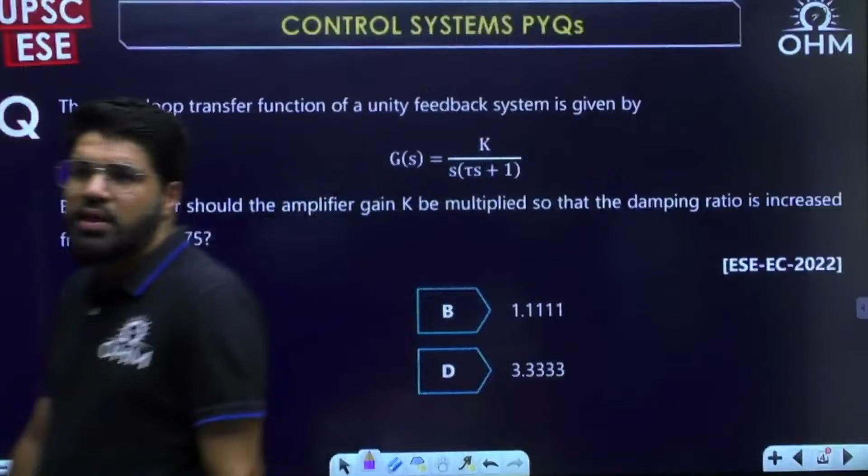So let's get moving ahead, guys, and start with the first question. The open loop transfer function of a unity feedback system is given as k upon s into tau s plus 1. By what factor should the amplifier gain k be multiplied so that the damping ratio is increased from 0.25 to 0.75? This is a fundamental question on damping ratio, and definitely from fundamental time response analysis as well as steady state errors, there are questions that come up in the examination. That is what is the first category of questions I have picked up.

If I start with the characteristic equation, it would be 1 plus k upon s into tau s plus 1 equal to 0. Simplifying this, I get s square tau plus s plus k equal to 0. Writing in the standard form, divide by tau: s square plus 1 by tau into s plus k by tau equal to 0. Now, by what factor should the gain k be multiplied so that damping ratio changes? For damping ratio, let me figure out first this term, which is omega n square. So omega n is root over k by tau. And then this central term, the coefficient of s, we all know is 2 zeta omega n.

Okay, if I place the value of omega n, which we just decided as root of k by tau, this is equivalent to 1 by tau. So what is the value of zeta? Root tau and tau get cancelled. Zeta can be written as 1 by 2 root k, and here also root tau, so 1 upon root k tau.

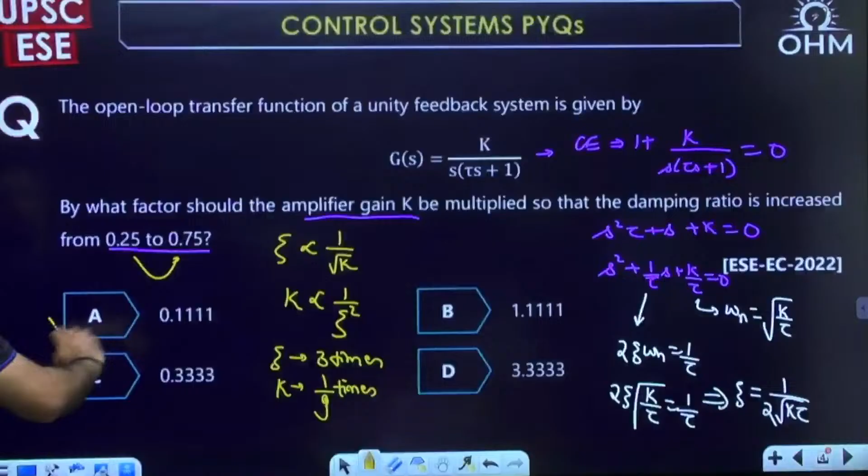Okay, answer has to be option number A. Yes, correct answer, Sai Vikas. So option number A is the correct answer. Okay, then moving ahead to the next question.

Here it is, a second order system with a zero at -2 and two poles at -3 plus j4 and -3 minus j4. This is a 2018 question, the previous one was 2022. These are the poles and zeros in the S plane. We need the undamped natural frequency and the damping factor.

This is a simple question because the zero would not be required here, if you only target the poles, which are given as -3 plus minus j4, complex conjugate poles. The complex conjugate poles for the second order control system are simply given by the formula minus alpha plus minus j omega d, equivalent to minus zeta omega n plus minus j omega d, where omega d is omega n root over 1 minus zeta square.

Now let me tell you there is a correction. They have written damping factor, but they have actually intended to ask damping ratio. Undamped natural frequency, yeah correct, they have intended to ask the damping ratio actually for the system, correct?

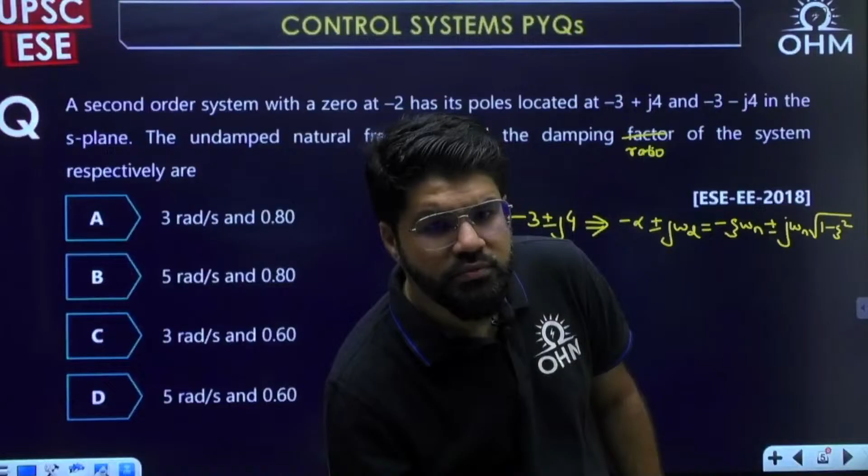Just a second. Okay, now, okay, just a second. Yeah.

Yes, good evening Nathan. Okay, so we have some answers. Sai Vikas and Rohan saying answer D. Okay, so see dear, very simple now.

If you want to calculate alpha, if you just correlate alpha, which is zeta into omega n, it is 3. The question is asking about the undamped natural frequency, which is omega n, and the damping ratio, which is zeta. What I know is the product of them has to be 3. Is there any option which satisfies the product of them equal to 3? Only option number D.

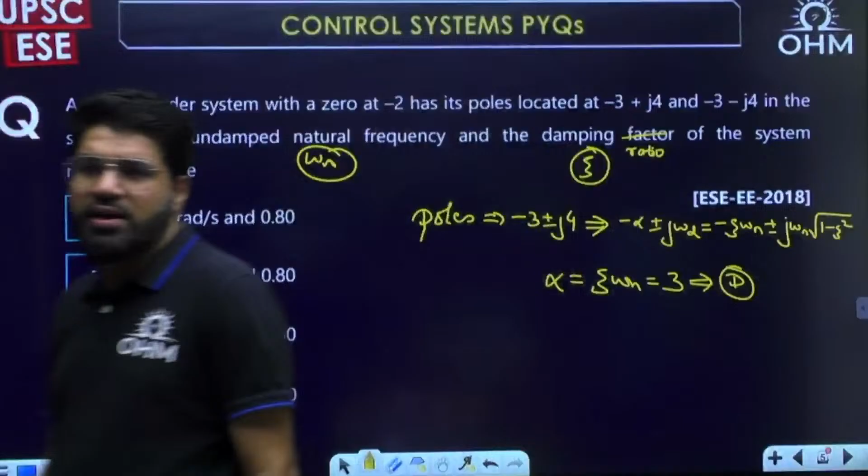You can stop here, although you have two relations, so from two relations you can find both. But zeta into omega n equal to 3 is only satisfied with option number D, 5 into 0.6. Only option number D satisfies, so you can definitely take that as the answer. Correct, okay, so yes, correct answer is option number D.

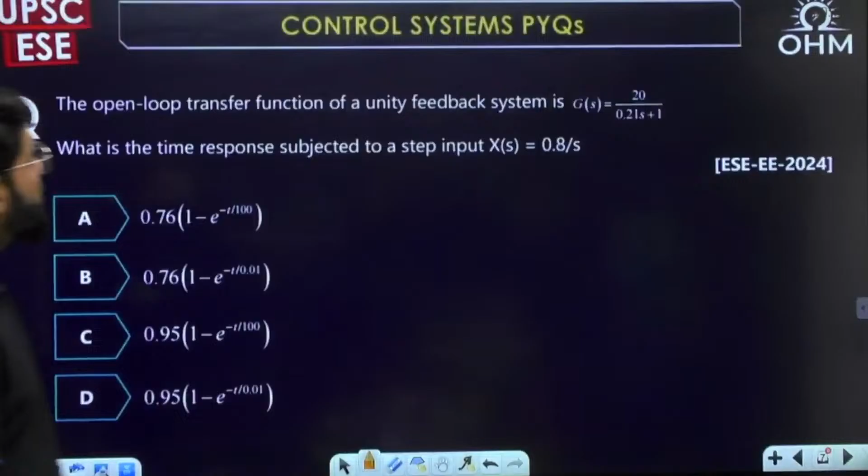Moving ahead to the next question then. Have a look into this next one. The open loop transfer function of a unity feedback system is given to you: 20 upon 0.21s plus 1. What is the time response subjected to the step input of 0.8 amplitude?

The step input of 0.8 by s is given, and the loop transfer function is given, of a unity feedback system. Now you see here, what is only given is GS, and if I talk about the closed loop transfer function, this is only the open loop transfer function given.

Unity feedback is there. The closed loop transfer function would be written as, the complete transfer function, I can write it this way: CS upon RS, which is equal to GS upon 1 plus GS, since unity feedback is there. That is what we need to simplify. So what is my final closed loop transfer function? It should be equal to, substituting GS, 20 by 0.21s plus 1, whole divided by 1 plus 20 upon 0.21s plus 1.

Correct it is. So now if I simplify, so what do I get is, it's going to be 20 multiplying by 0.21s plus 1, so 0.21s plus 1 plus 20, so plus 21. So it's basically a first order system only.

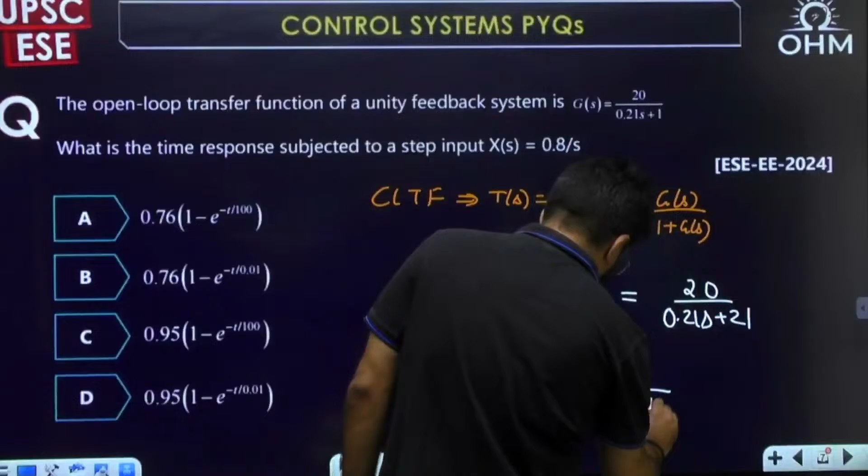So this looks like, 20 into 0.8 should be equal to how much? That is 16 divided by s into 0.21s plus 21, which we should break into partial fraction then immediately. Correct? Which we should break into the partial fraction.

So what is the output now? Converting to time domain, let me write down this expression again. 16 by s, 0.21s plus 21. That was 21 only, na? Correct, plus 21. In fact, to make it simple, you can write this way.

First of all, before taking the partial fraction, better to take 0.21 outside. So then it becomes s, and this will become 100. 0.21 into 100 will become 21. Now that becomes easy for you. This constant we can divide and simplify later. 16 upon 0.21. What is now there is some a by s plus b by s plus 100. That is what you have to simplify. Let me write down the result of partial fraction directly only then.

Okay, if I take result of partial fraction, 1 by s and the other term is 1 by s plus 100, you subtract both of them, you will get 100, so divide by 100. The 16 by 0.21 is outside. Now 0.21 into 100 again multiply, so answer is 16 by 21, then 1 by s minus 1 by s plus 100.

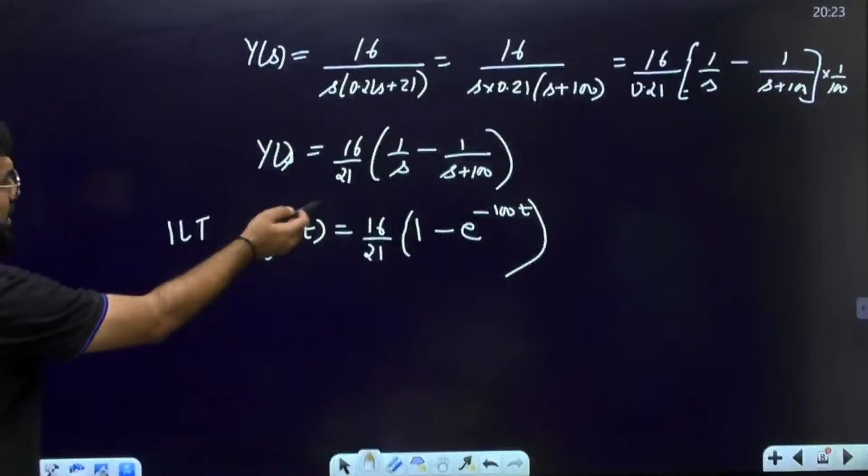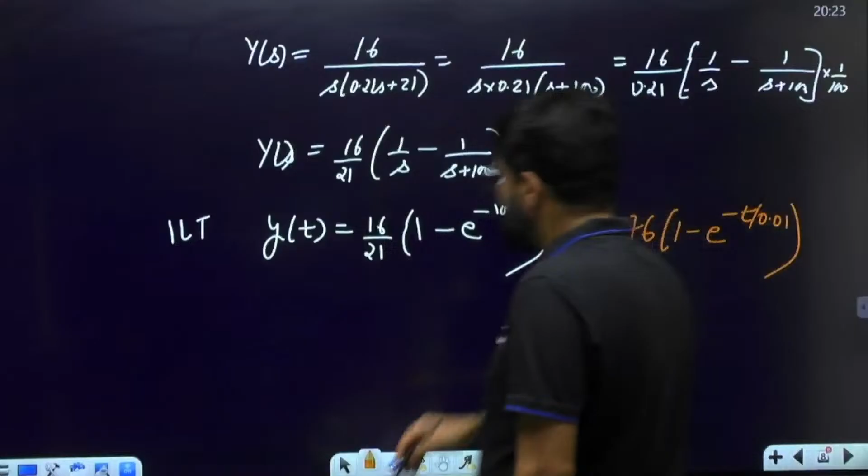16 by 21 approximately should be like 80%, 0.76, so then I will match it with option number B. That calculation part also not required, because anyways in ESE prelims you will not have the calculator, but it's not required. This can be approximated as 0.76, 1 minus e power minus t upon 0.01, e power minus 100t, correct.

So correct answer is option number B. Basic question which you can handle by the Laplace transform, nothing great there. Yes Rohan, correct answer B. Hope you have got it, any doubts you can let me know.

Correct, let's move ahead to the next question then. A basic question, a fundamental conceptual question only, 2023 engineering services.

Consider the following conditions for second order system when subject to unit step input. With critical damping, there are no oscillations. With no damping, the system output oscillates with constant frequency. Now let's see one by one. With critical damping, there are no oscillations - correct. For critically damped and over damped system, there are no oscillations, the system is non-oscillatory, so this is correct only.

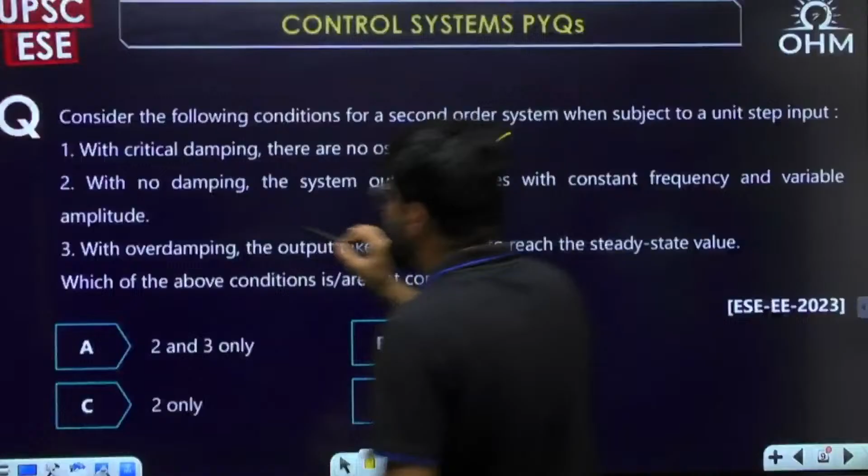With no damping, system output oscillates with constant frequency and variable amplitude. No - if there is no damping, if I take the standard response of second order system as an example, under no damping it oscillates definitely with a particular constant natural frequency, having maximum amplitude from 0 to 2, constant frequency, and the amplitude is also fixed. We cannot say variable amplitude, so the second statement is not entirely correct.

With over damping, the output takes longer time to reach the steady state value as compared to critically damped, so the third is also a correct statement. So 1 and 3 are correct statements, so option number D has to be marked.

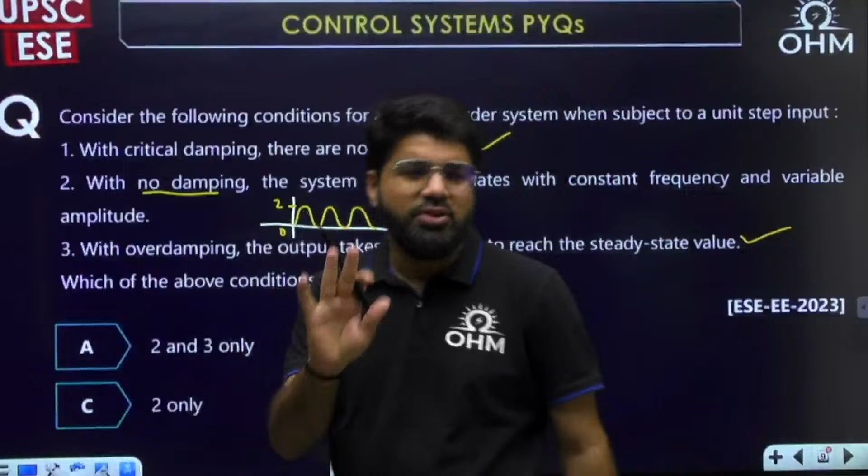So in engineering services, you be prepared for these definitions or theoretical questions. Everything should be there as a part of your notes. Nothing extraordinary to think, only basic fundamentals and facts. If you have revised your notes, it should be able to work out.

Right, sorry, it has to be option number C - the conditions which are not correct. The condition which is or are not correct, then it is C. But 2 is the only not correct one; 1 and 3 are the correct ones. Yes Rohan, 1 and 3 correct.

Yes PRV, correct answer. Option will be C because the question is finally asking which of the above conditions is or are not correct. So not correct means 2, that is option number C.

Right, so moving ahead to the next one. Moving ahead to the next question.

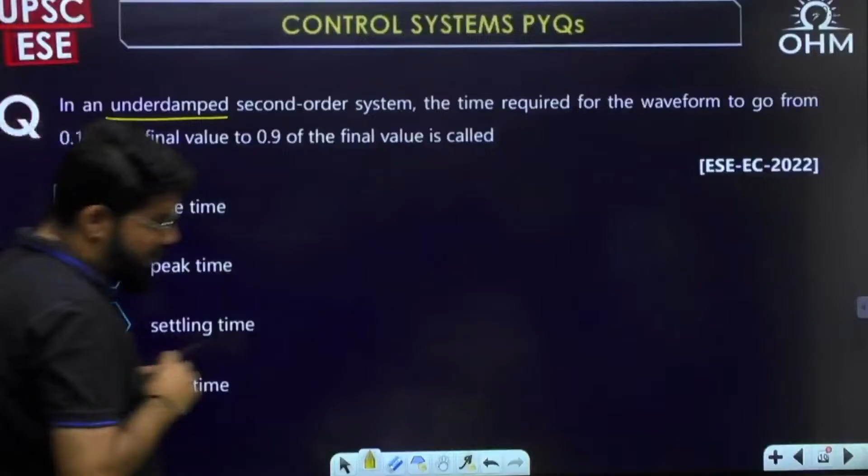In an underdamped second order system, the time required for the waveform to go from 0.1 of the final value to 0.9 of the final value. Now see, this is not 100% a correct question, because for underdamped systems, in different textbooks some different definitions are specified, but normally for an underdamped system, the rise time is defined as the time taken to reach from 0 to 100.

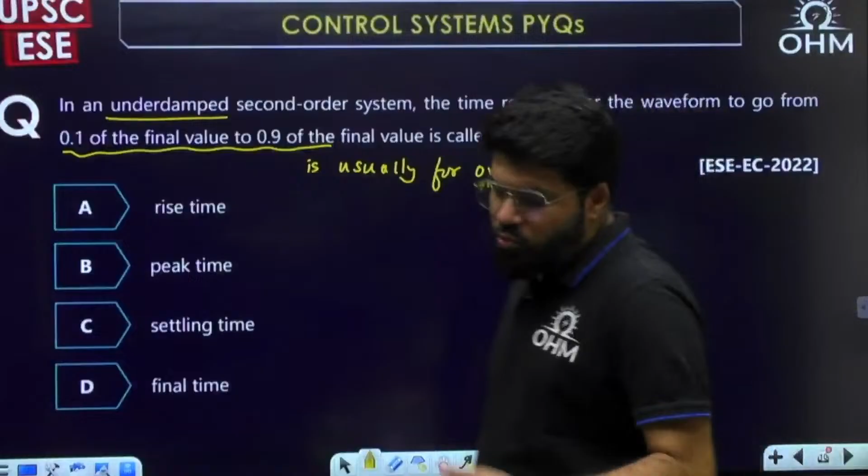This 10% to 90% definition is usually used for overdamped systems. But for underdamped systems, we mostly take it as 0 to 100%, that is the time taken to reach the final value for the first time.

But if some question is there, why have I still taken this? See, if there's an official 2022 question, we all know this is not peak time, settling time, and final time. Peak time is when the output reaches its maximum value, where the first overshoot occurs, where the peak overshoot occurs.

Settling time is the time where the output settles to a specific percentage of the final value, like when it reaches more than 95% or more than 98%, you can decide that percentage. So definitely it is not that - it is definitely rise time, but not 100% correct definition. But if an exam question is asking about rise time, that intent is clear, you should not overthink and directly mark the option.

One or two more questions around these definitions I want to show you. Have a look at this question, from 2022 only. Following statements regarding time response specifications: delay time is the time required for the step response to reach 10 to 90%, or 5 to 95%, or 0 to 100%. Now delay time is usually the time required to reach 0 to 50%.

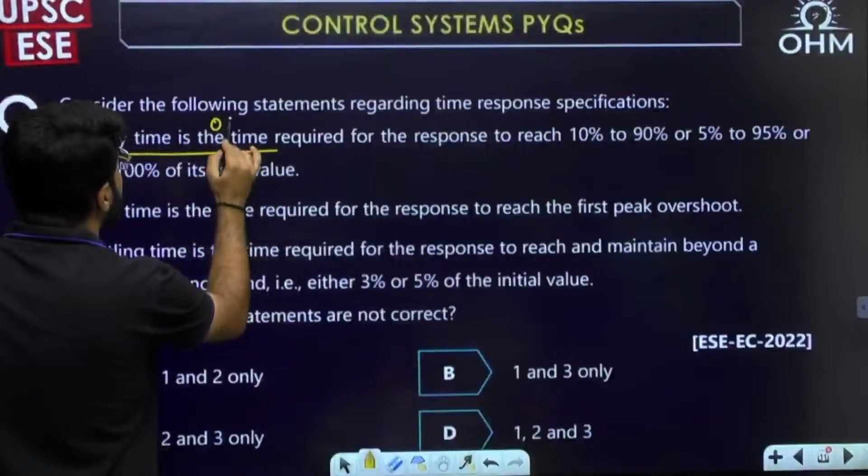These are the definitions for rise time. As I told you, this is the rise time definition for underdamped system. And 10 to 90% or 5 to 95% is usually the rise time definition for overdamped system. Now let us see what the second statement is telling.

Peak time is the time required for the response to reach the first peak overshoot. Correct? First peak overshoot, right? So this is true - time required to reach the first peak overshoot is the peak time.

Settling time is the time required for the response to reach and maintain beyond a specified tolerance band, that is either 3% or 5% or maybe 2% - they just gave an example. So this is also correct.

So which of the statements are not correct? I don't think this question is correct because second and third - again they are asking which of the statements are not correct. First is not correct.

With first and second - peak time is the time required for the response to reach the first peak overshoot, correct, first peak overshoot. Settling time is the time required... oh sorry, yeah, I read it wrong.

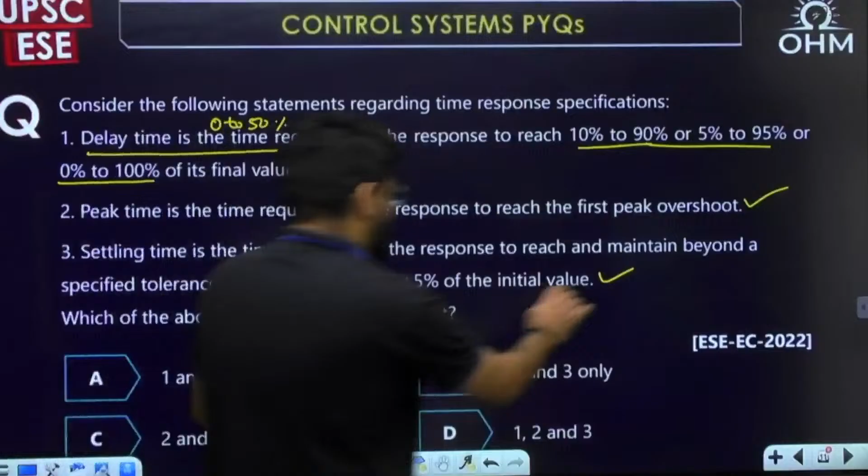This is false only because it says 3 to 5% of the initial value - the correct statement is final value. So rereading the definition, peak time is the time required to reach the first peak overshoot is the correct definition.

The first one was also wrong. Settling time is the time required for the response to reach and maintain above a specified tolerance band, that is 3 or 5%, or sometimes 2% also, of the final value, not of the initial value. So this is wrong - it should be final value, then it is the correct statement.

So 1 and 3 are wrong, and then option number B. Let me check it. Yes, correct answer - option number B it is. Let's move ahead.

Okay, Rakesh, yes. Okay, moving ahead to the next question.

Rise time again, see, 2024, last year question only. Rise time for the underdamped system is the time required for the response to rise from 5 to 95%. Again, you see for underdamped system they have mentioned this definition. I told you, usually we call it for overdamped, but okay, let me read the next also.

The amount of maximum overshoot directly indicates relative stability - higher the overshoot generally indicates a less stable system. This is definitely correct, because higher system having higher and larger overshoot usually is less stable. Settling time is the time required for the response to reach and maintain within a specified tolerance band, that is either 3% or 6% of the final value - again a true statement.

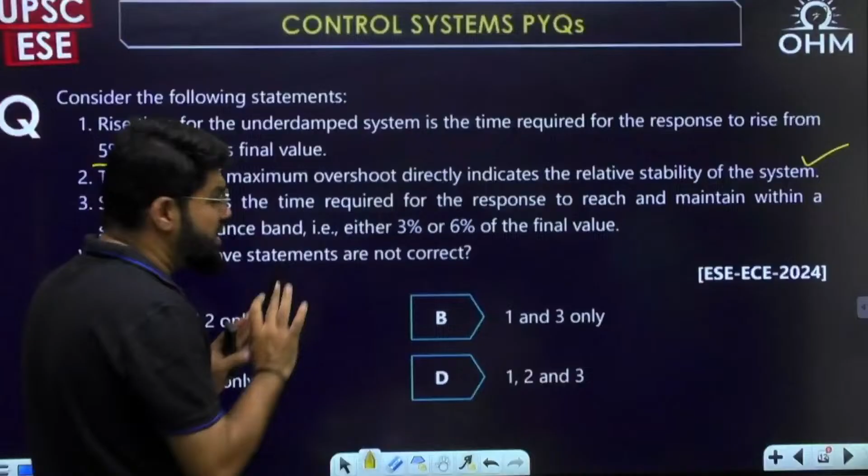Tolerance band is 3% or 6% of the final value. See, usually this is a correct statement, but again, as per standard book, normally what is settling time? Settling time is the time required by the output to reach within a specified percentage of the final value. Now that specified percentage you could specify as 98%, 97%, 95% also. But usually going beyond 95% we don't talk.

Conceptually, this is correct, but practically we don't talk about the value greater than 5%. So for that point of view, I would call it as false. So we can take this as, if it was 5%, then we can take it as okay. Again I say conceptually it is okay, but practically we don't accept that tolerance to be greater than 5%.

In fact, see why I am telling you conceptually this is correct, because in GATE examination once there was a question where they have discussed settling time with 6% of the value. In GATE exam they have actually discussed that question once. So conceptually it is okay, conceptually we can define settling time.

Let the settling time be the time required by the output to reach 94%. I am happy with 94%, even if my output reaches 94% or above, I will call that as settling, I will call that as steady state. And there is a question in GATE on the same concept, the 6% concept. So conceptually it is correct, but practically we don't consider beyond 5%. For that point of view, I will call it as a false statement.

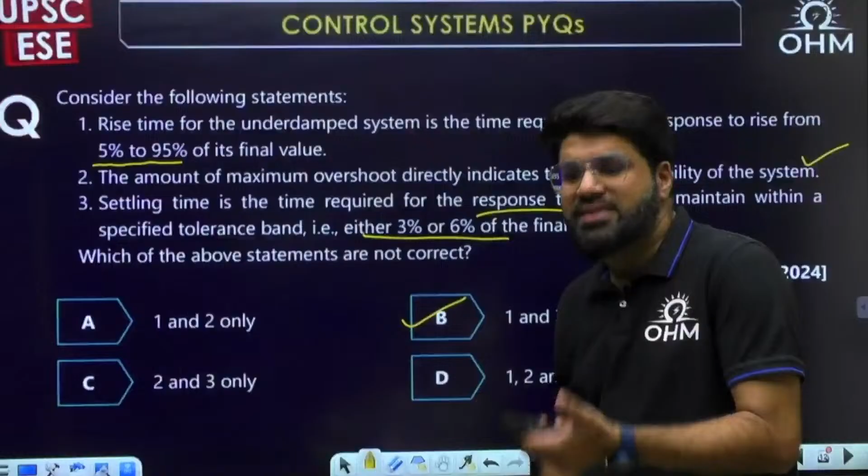No, Sai, because that is different. 6 by omega n is for critical damping. I'm not talking about the 6 by omega n formula, I'm talking about a question where 6% criteria was used. The formula you're telling me, 6 by omega n for critical damping, is the correct formula, but that is only for the 2% band, dear. That means when the output becomes 98% of the final value, that is the formula 6 by omega n.

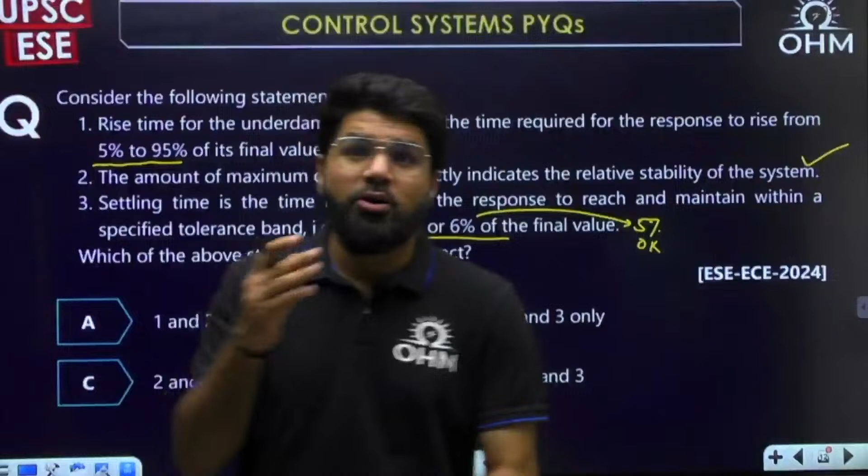I am telling you, there was a question in GATE where the output, they told, find a time, let the steady state be the time where the output reaches 94% of the final value. That percentage was specified, so tolerance becomes how much? The tolerance band becomes 6%. What you are telling is a different concept, that is correct for critical damping, but that is only 2% tolerance band. That formula, if you check correctly, is a 2% tolerance band formula. Okay, next question, dear.

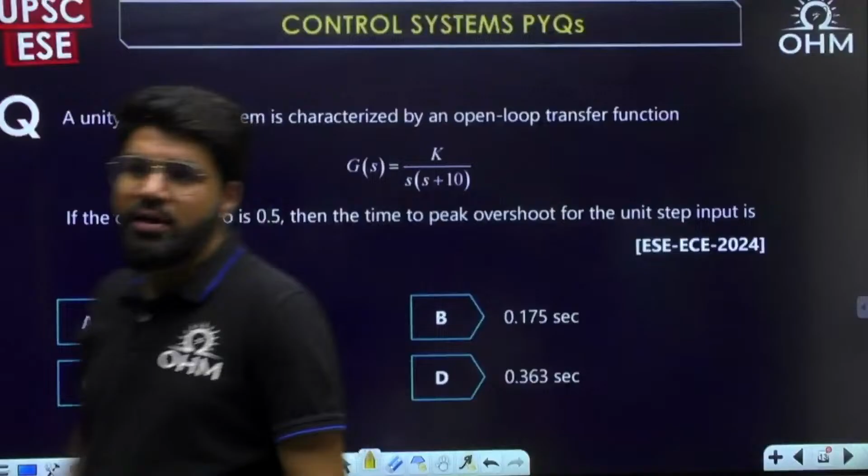A unity feedback system is characterized by open loop transfer function K upon S, S plus 10. If the damping ratio is 0.5, then we need the time to peak overshoot per unit step input. What do we need to calculate the time to peak overshoot? TP is given by pi by omega d, or pi upon omega n under root of 1 minus zeta square, where damping ratio is 0.5. The damping ratio zeta is given already, but we also need to figure out omega n from the given transfer function.

Given the open loop transfer function, I'll convert it to the characteristic equation: 1 plus GSHS equal to 0. So what do I get? S square plus 10s plus k equal to 0. Now, I'll use this term, because 2 zeta omega n is equal to how much? I need omega n, which can be obtained here directly. The k will not be required. 2 zeta omega n is 10, and zeta is given as 0.5. So 2 into 0.5 into omega n equals 10. So 0.5 into 2 equals 1 only. So omega n becomes 10.

If omega n is equal to 10, then Tp is given by pi divided by omega n under root of 1 minus zeta square. Omega n is 10, zeta is 0.5, 0.5 square is 1 by 4. So this is what we need to solve. This will finally turn out to be pi divided by, the 2 will cancel with 10, giving 5 root 3. So pi by 5 root 3. Of course you can complete the calculations on your own. Calculators are not there for ESE prelims, but right now let me just write down the answer.

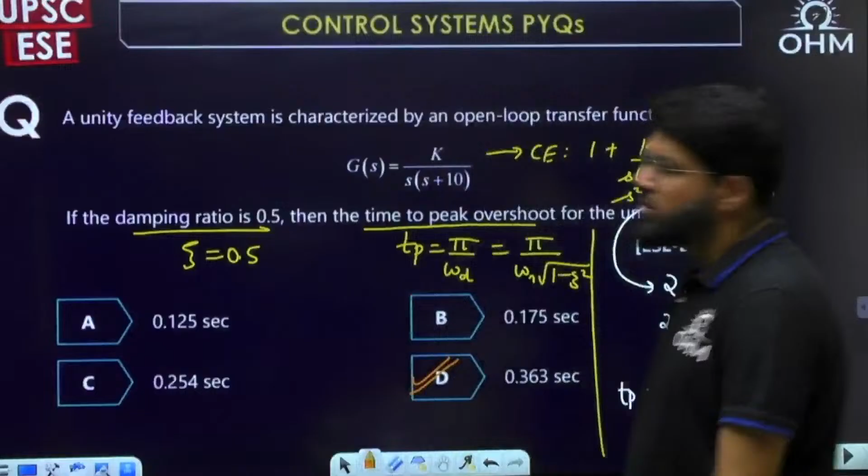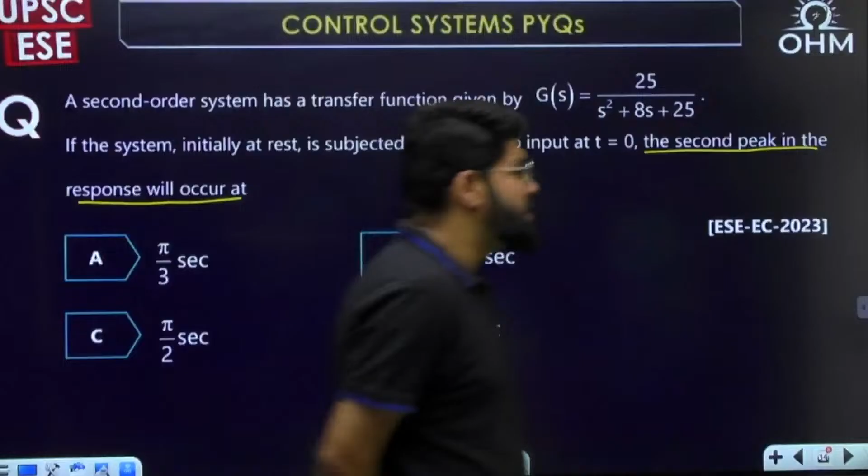A second order system has the transfer function 25 upon s square plus 8s plus 25. If the system, initially at rest, is subjected to a unit step input at t equal to 0, the second peak in the response will occur at... The first peak is the peak overshoot. The time for the second peak is given by the formula 3 pi by omega d. This is because the time for any overshoot is generally given by the formula n pi by omega d, where n equals 1, 3, 5, 7.

This is generally the time for any peak or overshoot. For any undershoot, the same formula applies, but n is even, at even multiples of n pi by omega d, meaning 2, 4, 6, etc. You get the respective undershoots. That is the formula to be used. Now, that means what I need is 3 pi by omega d.

Omega d is again required, so we can compare and find the value. Omega n square is 25, so omega n is 5. Then 2 zeta into omega n, which is 5, is equal to 8. So how much is zeta? 8 upon 10, that is 0.8. So this is 3 times pi by omega d. Omega d is omega n, that is 5 under root of 1 minus 0.8 square. Simple calculation, because 1 minus 0.8 square will be 0.6 square, and that is under root 0.6. 5 into 0.6 will be 3, and 3, 3 cancel, so the answer is only equal to pi.

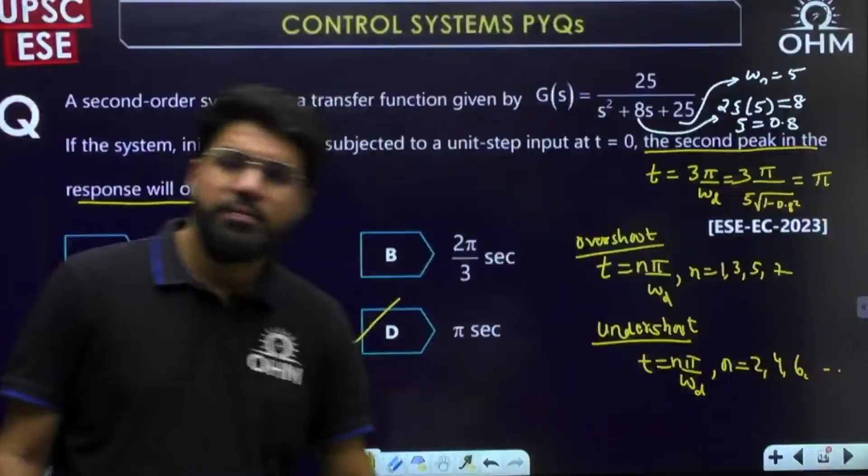Yes, Vikas, correct, answer D. Yes, that is the correct answer. Yes, Rohan said correct answer, D is the very correct answer. Moving ahead to the next one.

This is a good question, from 2022.

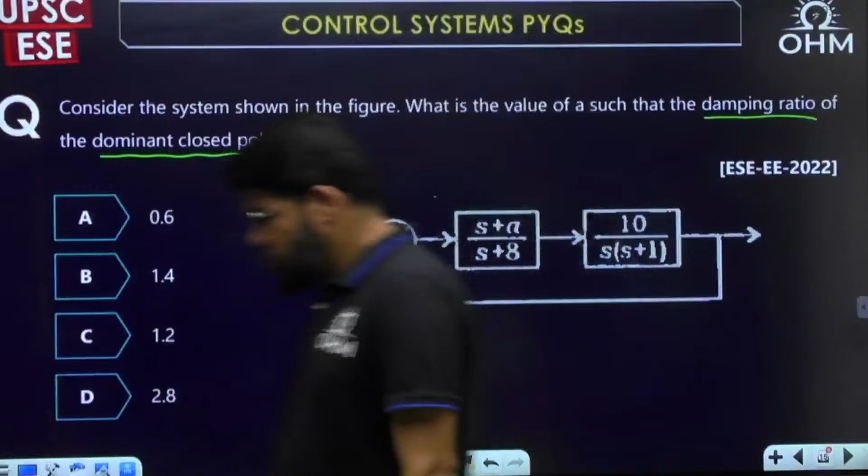Consider the system shown in the figure. What is the value of A such that the damping ratio of the dominant closed loop poles is 0.5? Let us work it out.

What is clearly the type of system going to be formed? S plus 8 into S plus 1 is definitely going to be a cubic characteristic equation. So what is the characteristic equation? If you start with 1 plus 10 into S plus A divided by S, S plus 1, S plus 8, this is going to be 0.

Now, if you multiply this out, it becomes S cube plus 1 plus 8, 9S square, plus 1 into 8, 8S, plus numerator expanded, 10S plus 10A equal to 0. So this is equivalent to S cube plus 9S square plus 18S plus 10A equal to 0.

Now, the question is, what is the value of A so that the damping ratio of the dominant closed loop poles is 0.5? The zeta should be 0.5.

If there is a characteristic equation which is of third order, it can be factorized as some S plus alpha, multiplied by S square plus 2 zeta omega n S plus omega n square equal to 0. What is the basic idea here? A cubic characteristic equation can be factorized into a first order and second order term. For the second order dominant poles, they have given the zeta. The only parameter known to you is zeta.

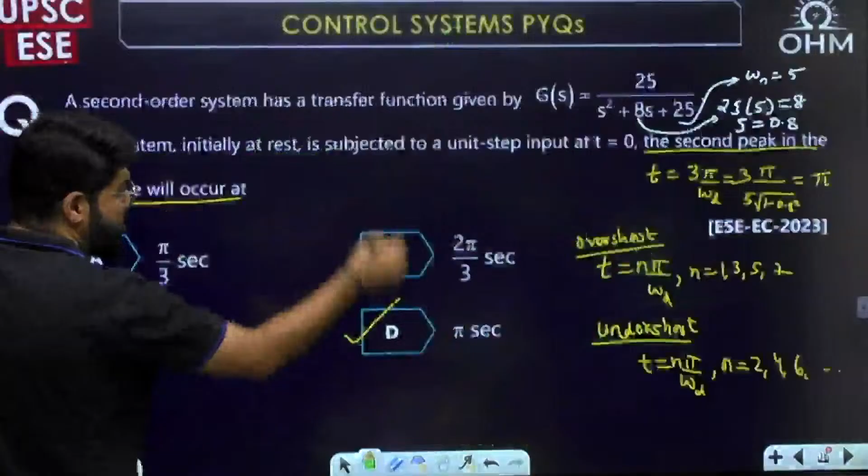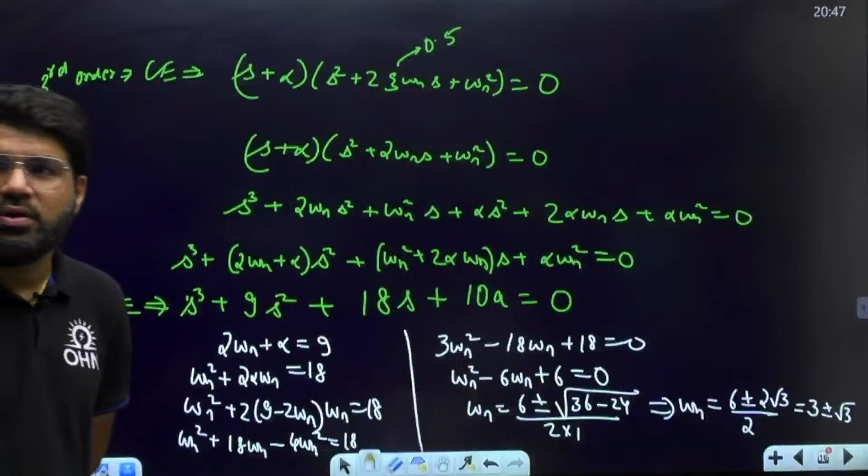3 plus minus root 3. Right, 3 plus minus... okay 3 plus minus root 3, I'm sorry. So that is 3 plus minus root 3. Omega n obtained is 3 plus or minus root 3.

Let us come to alpha now. What is alpha? Alpha is equal to 9. From here I have written alpha is equal to 9 minus 2 omega n. That is alpha. And the final value is alpha into omega n square. Let us see which of the options is actually going to match, alpha into omega n square.

So alpha can be 9 minus 2 into 3 plus minus root 3. So this becomes 9 minus 6, and then minus plus 2 root 3. So this is 3 minus plus 2 root 3. So there are two sets of values with me.

So if alpha is 3 minus 2 root 3 corresponding to the first value, then omega n I have taken as 3 plus root 3. And if omega n is taken as 3 minus root 3, then alpha will become 3 plus 2 root 3.

Question asks for the value of 10a, then we'll find a also. 10a is equal to alpha into omega n square. Right, alpha into omega n square. Correct, alpha into omega n square.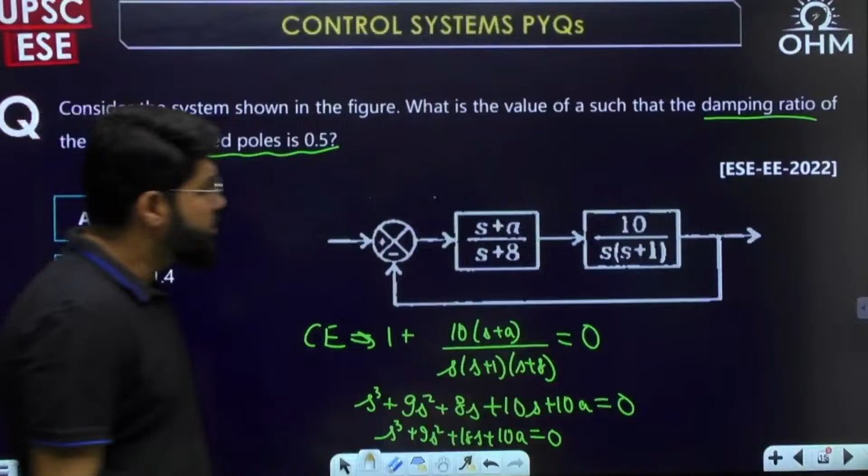Yeah, the steady state value will not be affected. That is what we have to take care of when we neglect the insignificant pole. They have told you that this has to be dominant.

But what is the characteristic equation in front of us? It is cubic. So I'm comparing this cubic equation with what can be a general cubic equation. Okay, so this is alpha into omega n square.

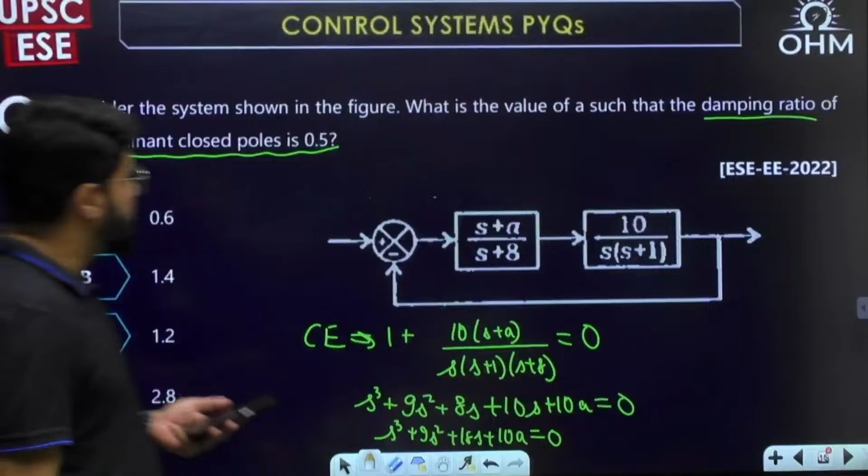So it leads us again to a detailed calculation. I think from here you can just calculate and complete it. This is definitely a time taking question.

No, see, what you are trying to neglect, Sai Vikas, you can't do directly. Why? Because you are trying to neglect the s plus 8 term from this transfer function. But the question is telling the dominant poles are the poles of what? Poles of the closed loop transfer function. You are trying to neglect s plus 8 from the open loop transfer function. So from that you will not be getting the answer.

If the closed loop transfer function was given and they mention that the second order poles will be dominant, then I can neglect, but the closed loop transfer function is not given. The open loop transfer function is given.

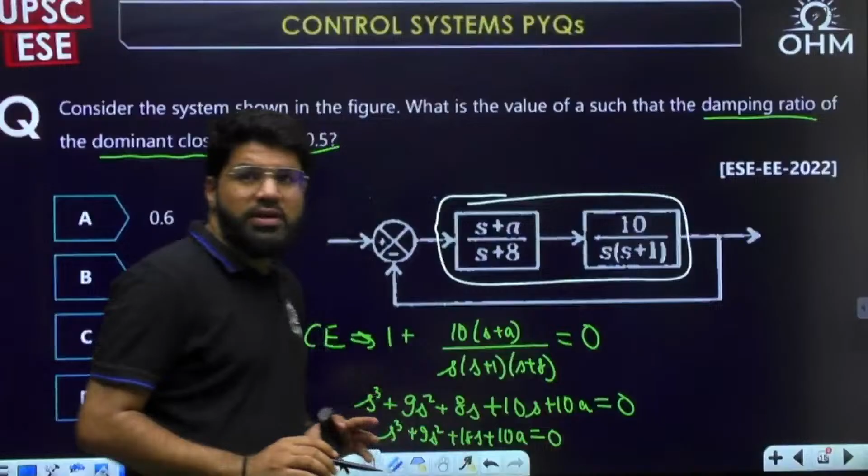And if you see in the open loop transfer function, there will not be any underdamped condition. There will not be complex conjugate poles as well. So that is not the correct logic. Your rule is correct, if you have to neglect, we'll take 8 common and all, but you are thinking only with respect to the open loop transfer function.

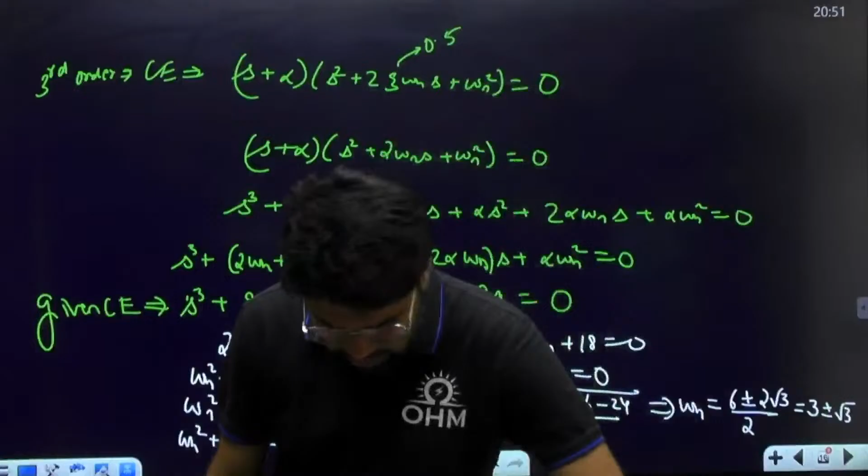Correct, Sai Vikas. Some calculative part is there that you can deal with and complete the answer, because the rest everything has been put in place. No further issue that I see—just recheck the equations I have written. I have given you how to solve this question numerically.

Going to the next question. What are the steady state errors for the inputs of 3ut, 3t ut, and 3t square ut respectively of the system shown in the figure, where ut is the unit step input. This is a 2024 previous year double question.

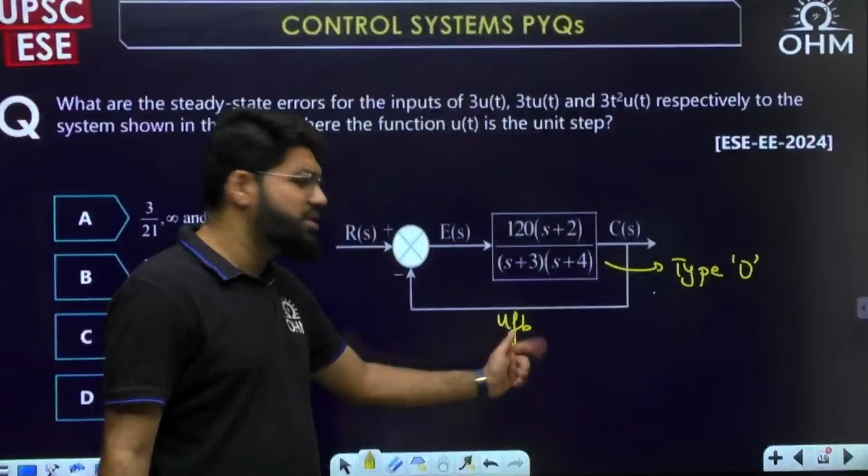Now if you see, what is the type of the system? It is clearly a unity feedback system. So I can define the type of the system. Are there any poles at origin? No. Type is the number of poles of G(s) at origin when the system is in unity feedback. So there are no poles of G(s) at origin—it is type 0.

Now, if this is type 0, what is the steady state error for unit step input? It will be finite. For unit step, but there are two answers you don't need, because it is type 0. The steady state error for unit step input is 1 upon 1 plus Kp, where Kp we will find out. But for unit ramp and for unit parabolic, any higher order input, in a type 0 system only the step input will give the finite error; any higher order input will give the infinite error.

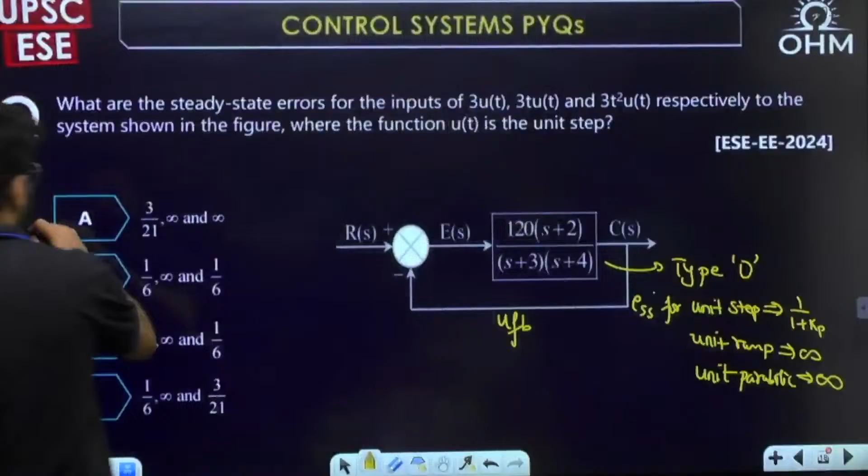And that leads to option number A. Finish—why solve further? Option number A.

Some finite answer for unit step. For 3ut, it will not be that one—for 3ut it will be 3 upon 1 plus Kp. That also you have to take care of: if the input is 3ut, the error is also amplified because of the linearity property of the system. So 3 upon 1 plus Kp. But that is also not required, because for ramp and parabolic, it has to be infinite.

This is the ramp input, and this is the parabolic input. So some constant and infinite—option number A. That constant also you can find out if you want; what is there in that, you can find out easily.

Next question. See, same year, same branch—you see the question. Doubly 2024, two questions on the same concept, on the same theme, only the data changes. Again, same unity feedback configuration given, only thing is it is a type 1 system.

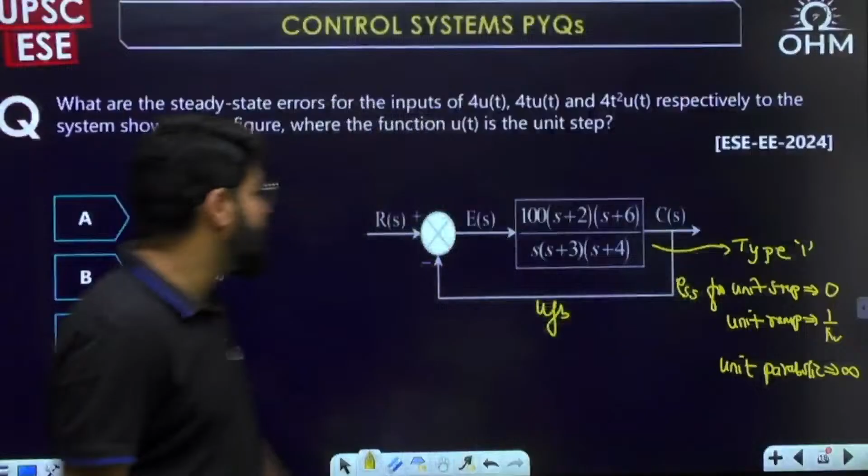So type 1 system means steady state error for unit step would be 0. It will give a finite non-zero error for ramp—for unit ramp it is 1 upon kV—and for unit parabolic it is infinity. So the answer sequence should be 0, finite, and infinity. Option number B, here it is.

Option number B, again a visual question. Only thing is here for 4ut it will be 0. For 4tut, this is what you have to think: if you are actually calculating, it should be 4 upon kV. I have written the result here for unit ramp, but for 4tut, that is 4 times ramp, the error will be 4 by kV—that you have to take care of.

That kV you can find—you know how to find kV: limit of s tending to 0, s into G(s). Not required here, so don't complete it. For the previous question, if you were to complete it, you have to find Kp, which is limit s tending to 0 of G(s).

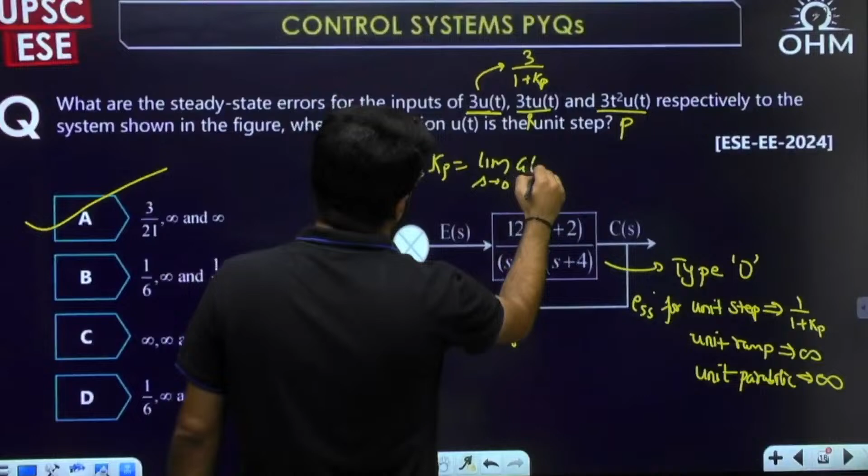Same year, two questions on the very same concept. So this is the answer B. Rohan correct, Hovant correct—option number B, it is simple.

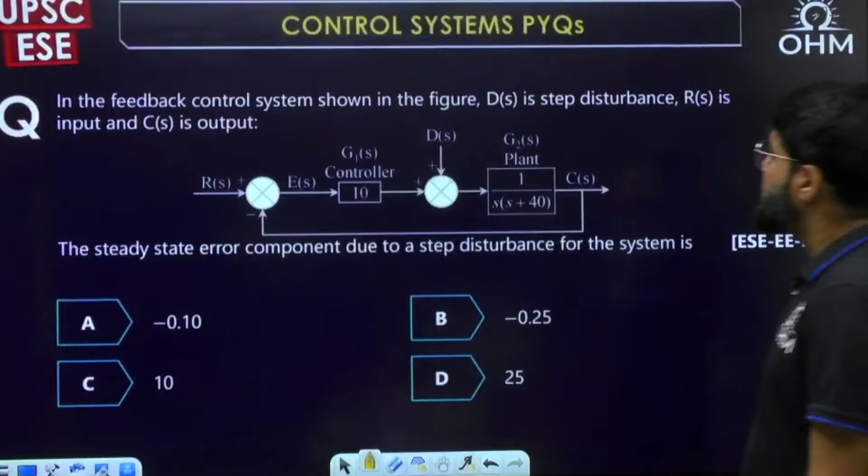Next question, 2022 double E question. In the feedback control system shown in the figure, DS is the step disturbance, RS is the input, and CS is the output. The steady state error component due to step disturbance - so now we are going to calculate steady state error due to step disturbance.

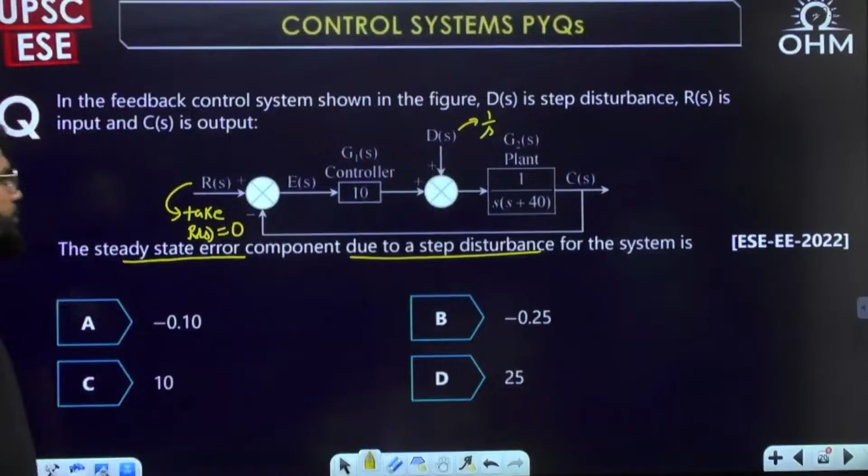When the disturbance is unit step, and unit step in Laplace transform is 1 by S, when you are calculating error due to step, automatically the input will be 0, its Laplace also will be 0, because we are calculating the error component due to disturbance input. The actual input you are going to take as 0 only.

This is due to the step disturbance. So then what is the error definition? Error is defined as the difference between the reference input and the obtained output, RT minus CT. It is RT minus CT, but since you have taken RT or RS equal to 0, error will be minus of CT.

As soon as you take RS equal to 0, what type of picture will you have in front of you? This is the plant gain, suppose G2. I'll make a simplified picture here, G2, and this is your output C.

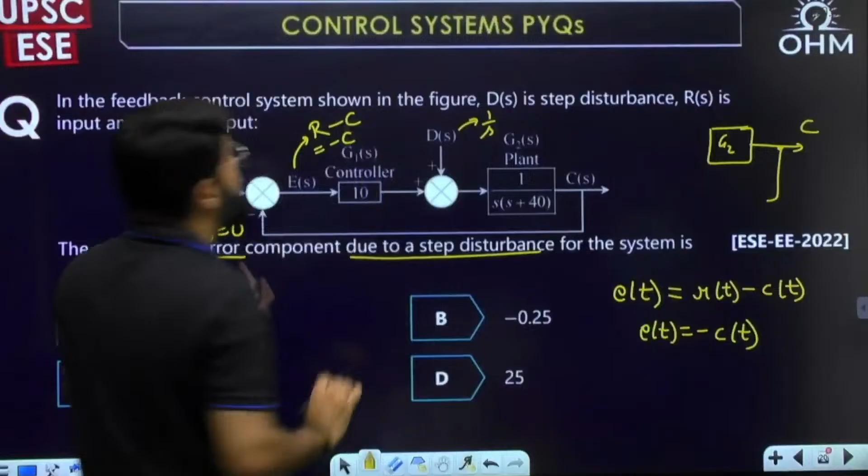Very clearly mentioned here - what is the error signal? It is the difference between RS and CS, R minus C, but R will be taken 0, so you will have to calculate minus C. That will be the error, but due to step disturbance.

So this is G2 and this is the output C, and since R is 0, you can adjust this minus gain here or to the gain of the next controller, and that is minus 10. This gain will become minus, and this minus has to be adjusted. R is 0. This is minus ES into 10.

This goes to the summing point where the disturbance signal D is applied. So what is the output C then equal to? Or we can write down C by D here. What is going to be the C by D ratio?

Considering D as the disturbance input, the forward path gain G2 divided by 1 plus - it looks like positive feedback, but the feedback gain is negative, so 1 minus of G2 into minus 10, that is 1 minus GS HS, HS is minus 10 here. Why 1 minus? Because this looks like positive feedback. So it is ultimately G2 upon 1 plus 10 G2.

G2 I can substitute, or we will do it later only. So what is the output C? It is equal to D into G2 upon 1 plus 10 G2. Now, what is the steady state error? Steady state error is limit T tending to infinity ET, or by the final value theorem, it is limit S tending to 0, S into ES.

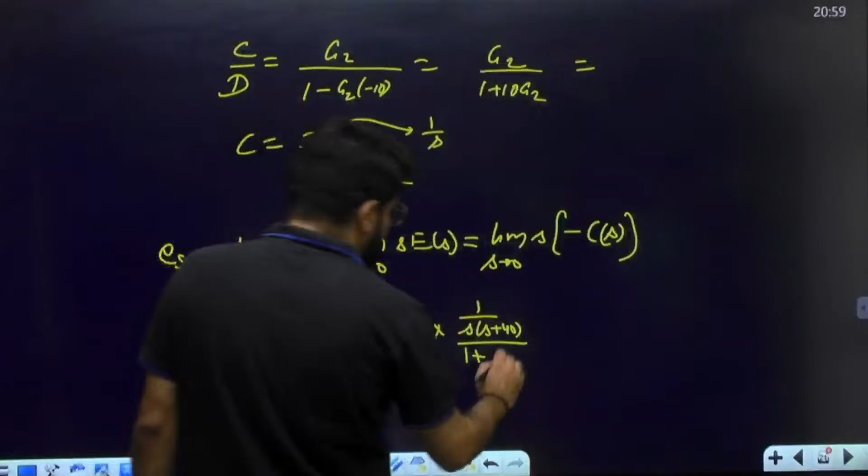What is D? D is 1 by S with the value of D, D means disturbance, which is the step input. Step disturbance is given. So limit S tending to 0, S into minus of CS, that is minus of 1 by S into G2. I'll substitute G2 now: 1 upon S, S plus 40, divided by 1 plus, 1 by S, S plus 40.

So then this initial S and S got cancelled. This is minus, I take outside, limit of S tending to 0, S plus 40 multiplied throughout, so 1 upon S, S plus 40 plus 1. So minus of 1 upon 1, this is 0, so minus 1. The answer has to be minus 1.

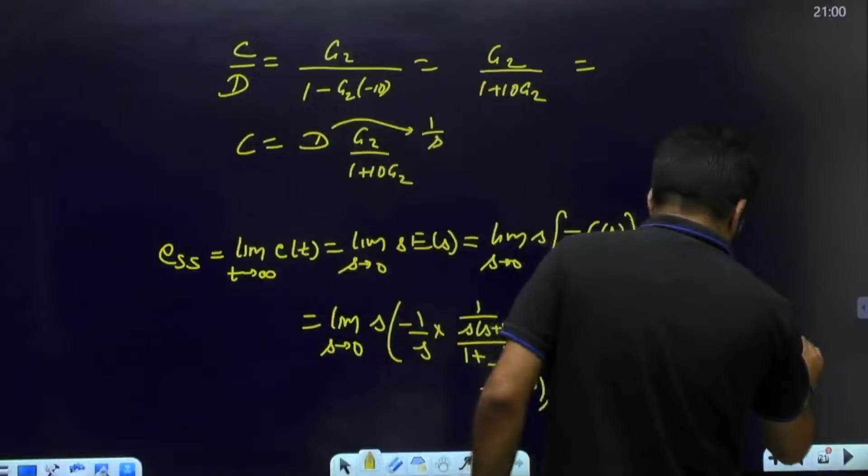Did I miss anything? That 10 factor was - oh sorry, I missed this factor, 10 G2. So here it becomes 10, 1 upon minus 1 by 10, minus 0.1. Option number A is the correct answer, Sai Vikas confirmed. Option number A, minus 0.1 it is.

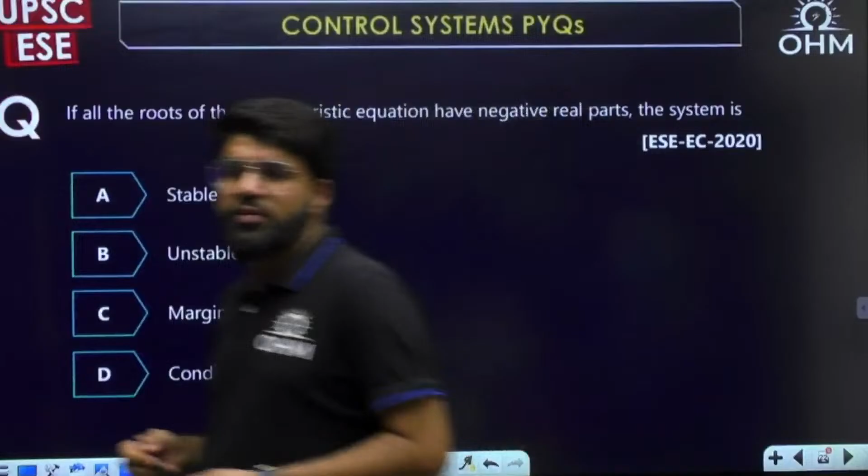Okay, moving ahead to the next. If all the roots of the characteristic equation have negative real part, okay, again a fundamental definition question talking about stability. Yes, Rohan, A answer correct for the previous one. So if all the roots of the characteristic equation have negative real part, then the system is what? Stable, na? All of them have negative real part, that means all are in LHP. So the system is purely stable.

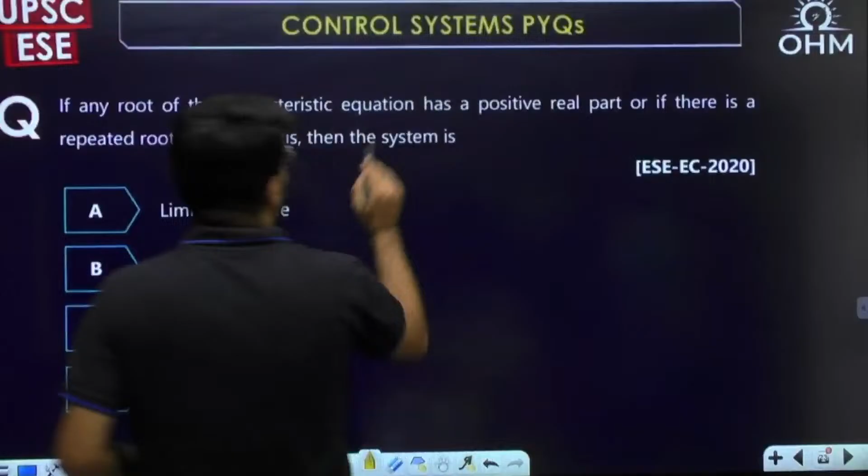Next question. If any root of the characteristic equation has a positive real part, meaning RHP root, or if there is a repeated root on the j-omega axis, both of them correspond to an unstable system. This is option number D.

Again 2020, both of them EC 2020. See, sometimes in the same year, like I have shown you, EE 2024, this is EC 2020, repeated pattern question. I mean, repeated concept, not 100% question same, but stable and unstable condition, basic condition.

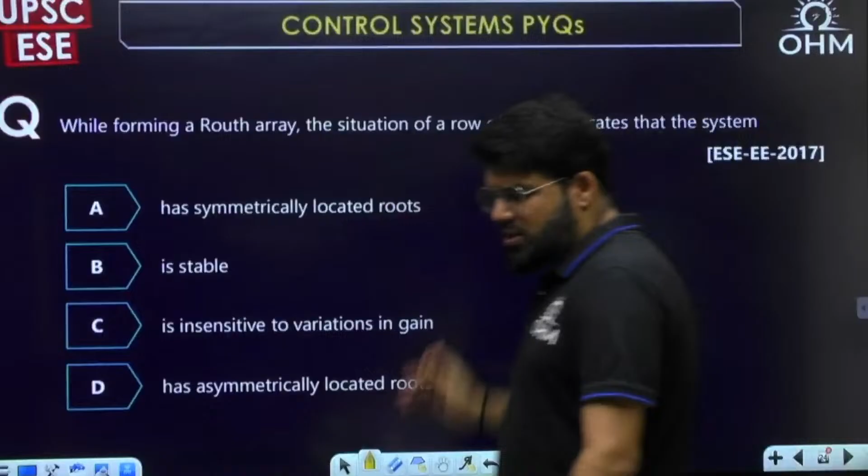Next one, 2017 question: while forming a Routh array, the situation of a row of 0 indicates what? The situation of row of zero, when there is an entire row of 0, the system can never be stable. That is sure. It may be unstable or marginally stable. It can never be purely stable. But yes, whenever there is a row of 0, the system has symmetrically located roots.

Symmetric with respect to what? You can mention that symmetric with respect to the origin. The roots of the auxiliary equation, which is formed by the row above the row of 0, will always have symmetrical roots with respect to the origin.

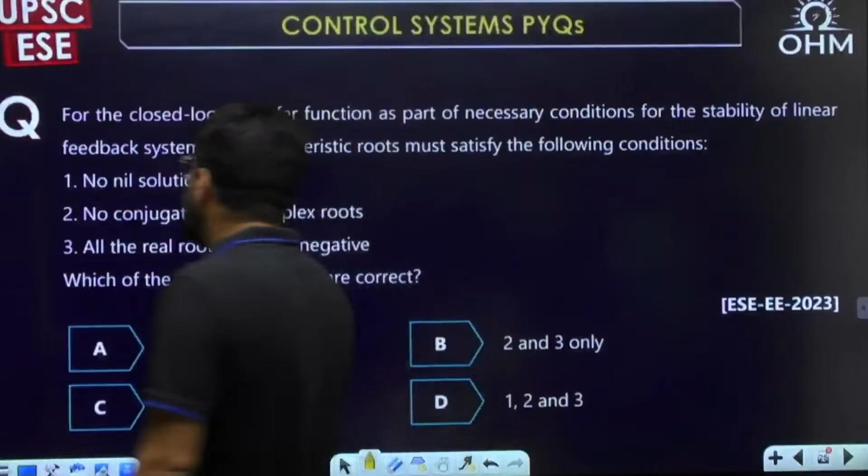The simple question, 2023 EE: for the closed loop transfer function, as a part of the necessary condition for stability of a linear feedback system, the characteristic roots must satisfy the following condition.

As a part of necessary condition, it should have no nil solution, it should have no conjugate pure complex roots, all the roots must be negative. All the real roots must be negative. Definitely correct.

Characteristic roots must satisfy the following condition for stability, right? So definitely, look into this: no conjugate pure complex roots. Nil solution means at origin. See, if there are complex conjugate roots, pure complex means sigma plus j omega. But if there are pure conjugate roots, both in LHP, then the system can be stable. So this is not a necessary condition.

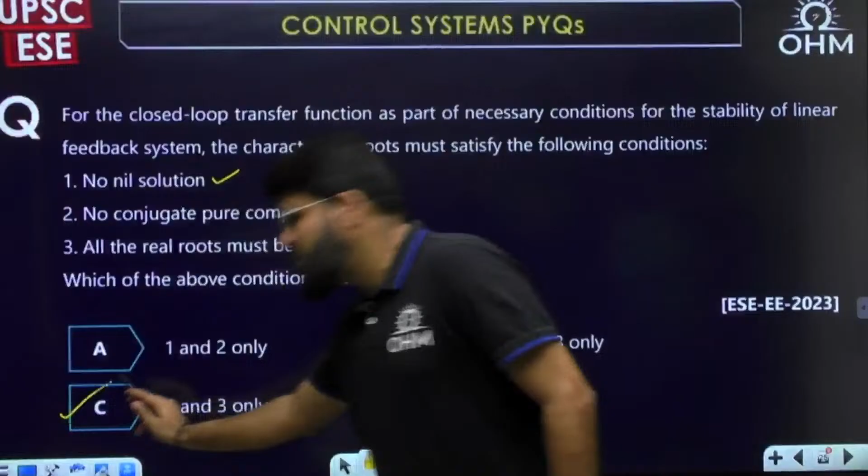If the roots are real, they must be negative, LHP is a necessary condition. No nil solution, no origin root, is again a necessary condition. So option number 1 and 3 — they are asking correct or incorrect? Correct only. So 1 and 3, that is option number C. Statement 1 and 3, option number C, it is correct.

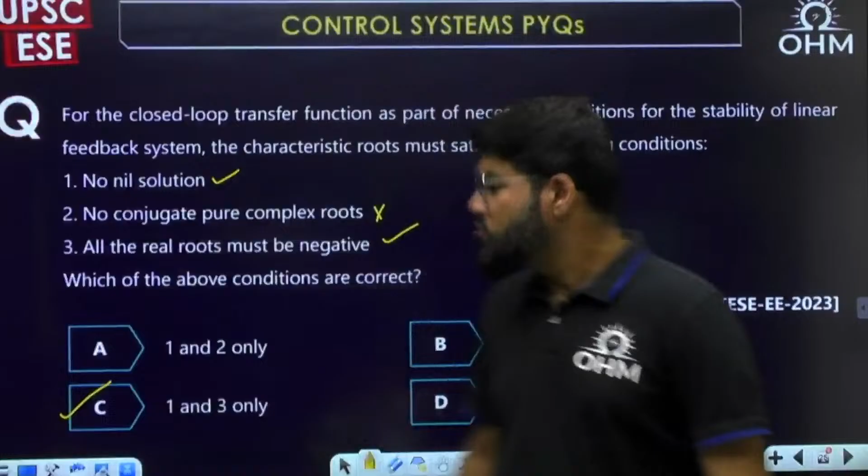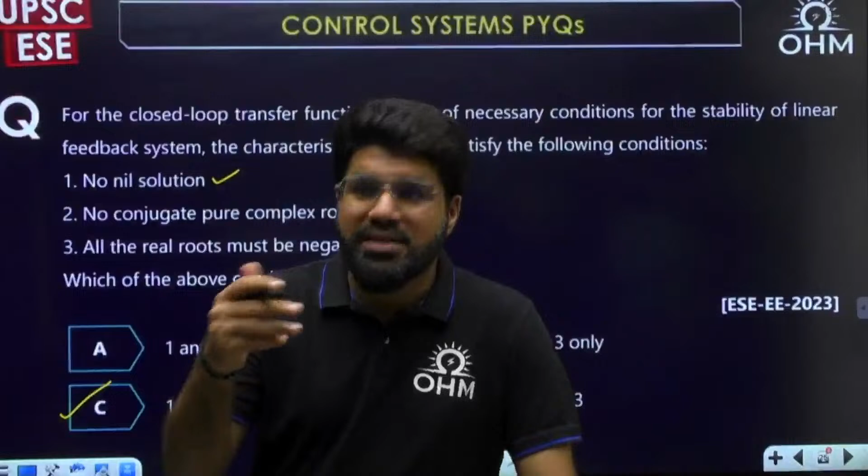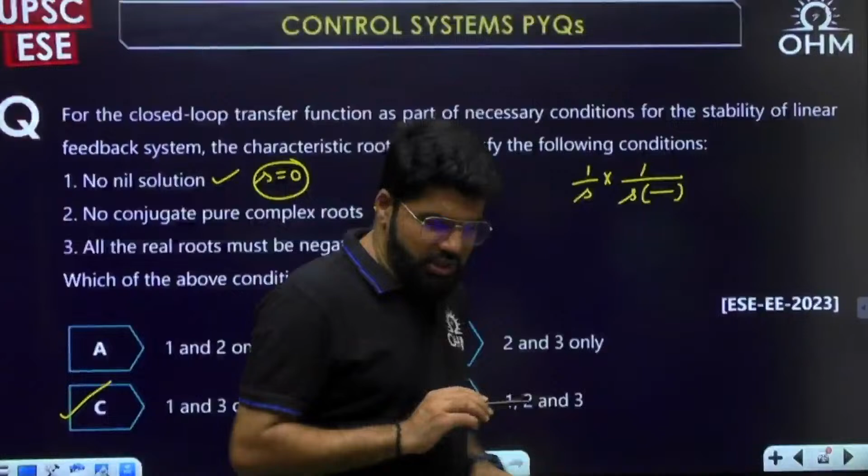No conjugate pure complex — see, now pure complex is not necessary. No nil solution means — I'll talk about both 1 and 2. What is the meaning of nil solution? Nil solution means origin. Now when there is a single root at origin, what will happen? I'll explain. See, if you are trying to find a step response, how do you find it? Input into gain, and the gain has one root at origin. Understand this one first, then I'll come to 2. No nil solution, nil solution means origin, zero solution means origin. So 1 by S into 1 by S, 1 by S into something — right, so now what is this? I'm trying to find step response.

So for step response, the transfer function of the system, which can have some numerator also, no problem, into the step input. Step input is 1 by S. Now, when you try to calculate output, it becomes 1 by S square. It is having some S square term. And when you break it into partial fraction, you all know what is going to happen.

A ramp term is going to come up. That is why system output at t, ramp means the unbounded output. What is ramp? It is t into u(t). At t tending to infinity, output will be unbounded.

That is why we don't consider a nil solution, meaning solution at origin. The system cannot be purely stable there. And what we are asking, as a part of stability of linear systems, this is option number 1. So 1 is correct. 3 is anyway correct.

Now option 2, no conjugate complex roots. No conjugate complex roots, right? Pure, see, pure imaginary if they mean. No conjugate pure complex—pure complex, if you want to take it, then they should mention pure imaginary. Pure complex means let's take it as pure imaginary. Then this is not definitely a required condition, not a necessary condition.

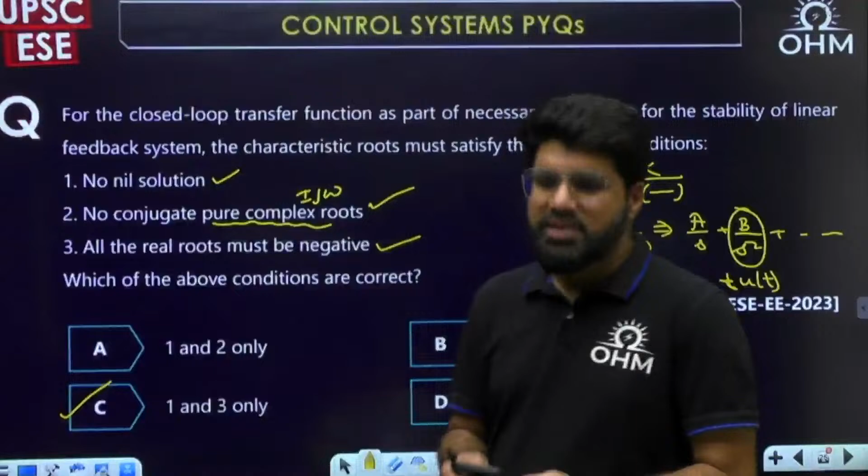So which of the following is correct? No nil solution is correct. Then this is also correct, because if you take it as pure imaginary roots, then this becomes correct. This becomes a necessary condition, because with pure imaginary root, the system can be maximum marginally stable.

So then it will be 1, 2, 3. Then also it's not going to be C. That is why I explained you the first one. So then it is D: 1, 2, 3. We'll take all three.

No conjugate pure complex—okay, I just focus on the complex word. No conjugate pure complex roots. I didn't focus on the word pure complex; I was just focusing on complex. So conjugate complex roots can be there. Pure conjugate, pure complex roots should not be there.

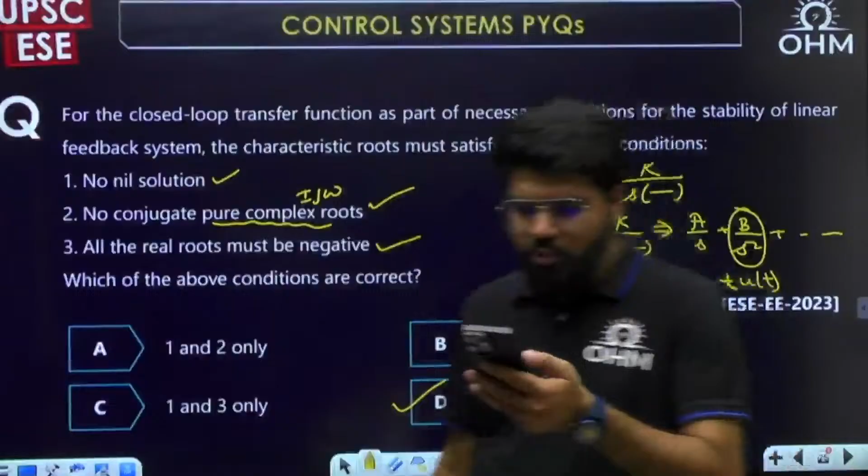Is it okay now? Then we will mark option number D. 1 is anyway, I explained why 1 has to be taken here. There's also a necessary condition: no root at origin. Now Rohan and Sai Vikas, then we'll take 1, 2 and 3. 1 is anyway there.

I would say for second order, what is the condition for stability? No need to go for Routh-Hurwitz also. For second order, if all the coefficients are of the same sign, then the system is stable. For second order, there is no Routh-Hurwitz condition required—you can apply it, but it's not required. For higher order, third and fourth, Routh-Hurwitz should be applied.

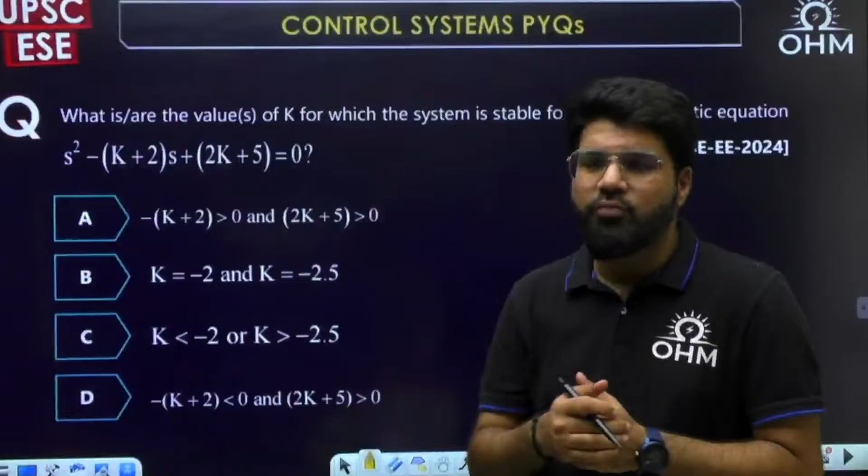So what can I say here? This is 1, this is minus of K plus 2, so this is already positive. We start with positive, so minus of K plus 2 should also be positive. This should be positive. And then 2K plus 5, the next coefficient, 2K plus 5 should also be positive.

Then also, what is the correct answer, A or C? The correct answer is A, because we require both of them.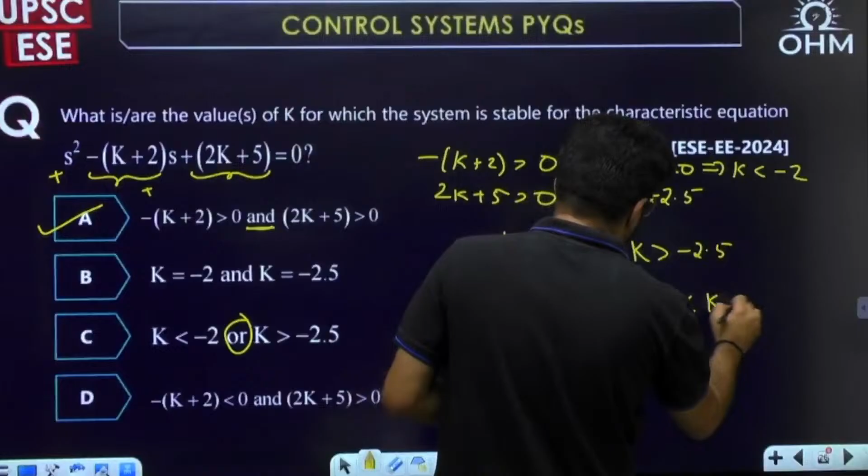Here the word is 'or', that is wrong. Option A only. After solving them, they have written both conditions with 'or', but it should be 'and' only. K less than minus 2, and K greater than minus 2.5. So if they ask the entire range of K, I have K less than minus 2 at the same time K greater than minus 2.5. That means the range of K is minus 2.5 up to minus 2. If they ask the entire range, that's also a possible question. So minus 2.5 to minus 2.

Next one, 2023 ESE EE. The Routh array of an open loop transfer function of a unity negative feedback control system is given. The system is stable and unstable when the values of K are respectively what? We can directly find the range of K for stability. A Routh array is completely given to you, a constructed Routh array. We'll just inspect the first column.

This is positive, this is positive. So I have to ensure 32 minus 4K is positive. The denominator 3 is anyway positive, so I have to ensure this is positive. That means 32 greater than 4K, or K is less than 8. K is less than 8 for stability. At the same time, 1 plus K has to be positive, so K must be greater than minus 1. The range of K for stability is minus 1 to 8.

Now for stability, K should be less than 8. That is possible, and for K greater than 8 the system is unstable. So are there two possibilities coming? I will have to reconfirm. Let me check it again. 32 minus 4K has to be positive, correct? Only 32 greater than 4K, so K is less than 8. At the same time, 1 plus K has to be positive, so the range of K is minus 1 to 8.

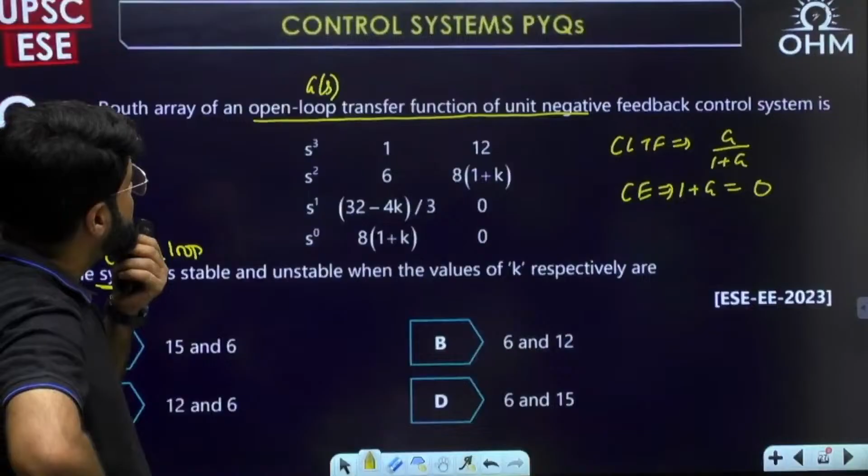Routh array of open loop transfer function — that means how the G should be. If I have to form the equation, this becomes s cubed plus 6s squared plus 12s plus K, 8 into 1 plus K equal to 0. Correct? And this should be the characteristic equation corresponding to G(s). That means the G(s) should be some numerator part upon this s cubed plus 6s squared plus 12s plus 8 into 1 plus K. This is what this question would actually take you towards.

Let me assume that there are no zeros. Let me consider this only.

Then if I have to form the entire characteristic equation, assuming there are no zeros, it will be 1 plus GS equal to 0. That gives s cube plus 6s square plus 12s plus 8 times 1 plus k plus k, which becomes 8 plus 8k plus k, that is 8 plus 9k.

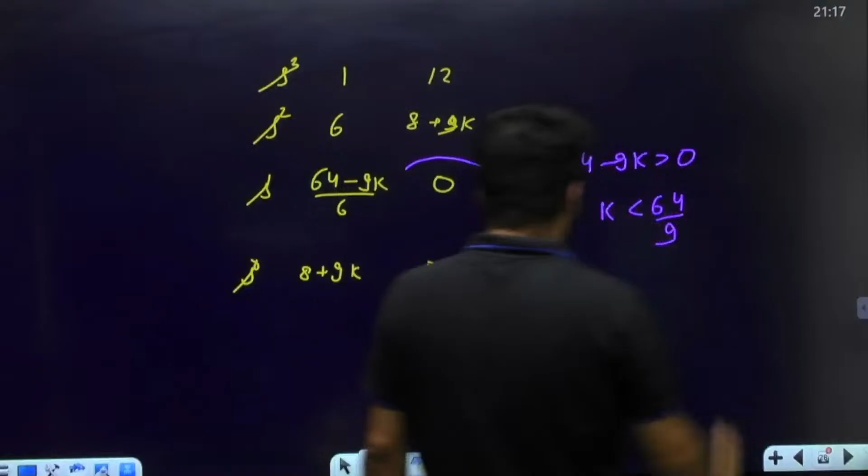Then also it is not going to perfectly match. I think there is something which is not matching with the data.

They give the Routh array of the open loop. Even considering that, the range of k for stability earlier also was coming to be k less than 8. Either they have to mention unity negative feedback, which is what is clearly stated, or there's some calculation error, though I don't think so. 32 minus, here also 64 minus 9 into 6, positive only, 9 into 15.

Guys, I'll recheck this question, maybe there is some error. There's something I need to recheck with the question. The data is not being consistent here for sure. I'll recheck this.

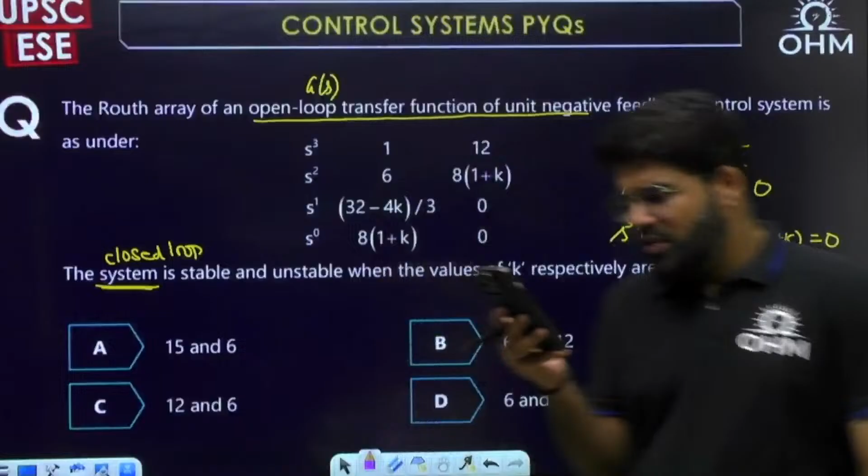That's what we have done, Rohan. We have figured out the CLTF or characteristic equation. So either the options are wrong or maybe some numbers are wrong. No problem, but I have explained the concept. Yes, that is correct, Rohan Singh. They have very clearly mentioned it is the open loop transfer function Routh array from which we can think about CLTF or the direct final characteristic equation. That is what I have tried to do here.

But still there is no option that is matching, so I'll recheck this question whether there is a typing error. Maybe the question was correct here. I've got some typing error. I'll check it and update you. So this is one theme of the question that I've taken here.

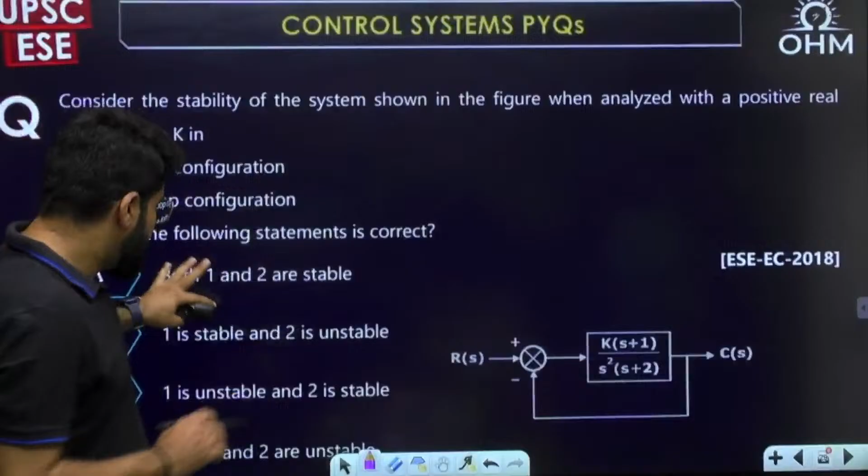Next question: consider the stability of the system shown in the figure when analyzed with a positive real value of gain k, in the open loop configuration and in the closed loop configuration. Which of the following statements is correct? Both 1 and 2 are stable or unstable, where 1 means open loop configuration. So dear, we can directly say here what are the open loop poles?

In the open loop configuration, there are poles at 0, 0, minus 2. An origin pole, that too a repeated origin pole, is unstable. So the first one is definitely unstable.

Now in the closed loop configuration, I will start with the characteristic equation: 1 plus k times (s plus 1) upon s square times (s plus 2) equal to 0. So what do I get? A cubic equation: s cube plus 2s square plus ks plus k equal to 0.

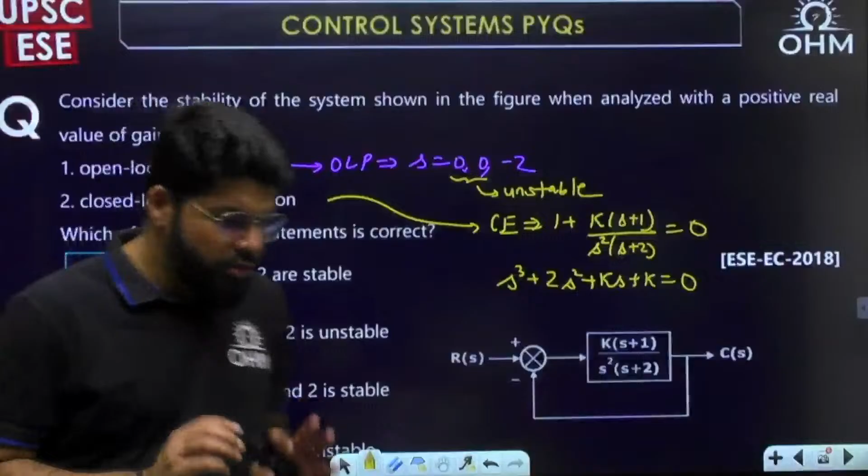Now, before I solve this, I want to tell you that in general there can be many questions around the cubic equation. If you know it, very good; otherwise, generally for a cubic equation of the form as cube plus bs square plus cs plus d equal to 0, of course for cubic the Routh array is required, but applying it once you see a very simple condition.

Okay, you see now, alternate coefficients AC and then BD. When I start the S power 1 row, I get BC minus AD, correct? BC minus AD upon B, last element 0. S power 0, this factor, suppose x into D by x, it will be D and 0. Of course, I have assumed that all A, B, C, D are positive.

So A positive, B positive, D positive. You have to ensure BC minus AD also positive for stability. So BC should be greater than AD. The product of inner terms should be greater than the product of outer terms. Remember it simply, okay?

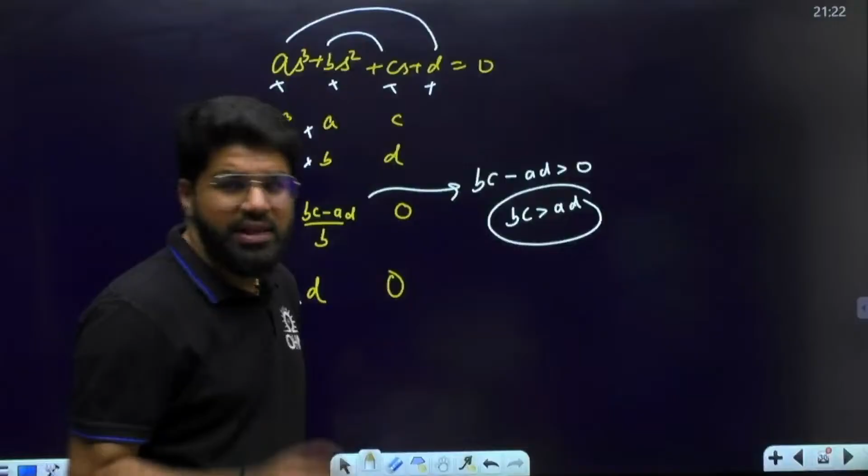So what is the inner term? For stability, this inner term should be greater than outer terms. So for 2k, you want the system to be stable, and this is going to be stable if BC greater than AD, and vice versa. If BC less than AD, then unstable. Equal to means marginally stable, boundary value.

So BC should be greater than AD. Now what is BC here? 2k. And what is AD here? It is k. 2k should be greater than k. So bring the k on the left side. That means k should be greater than how much? K should be greater than 0, and that is already given, I think. There is a positive real value of k.

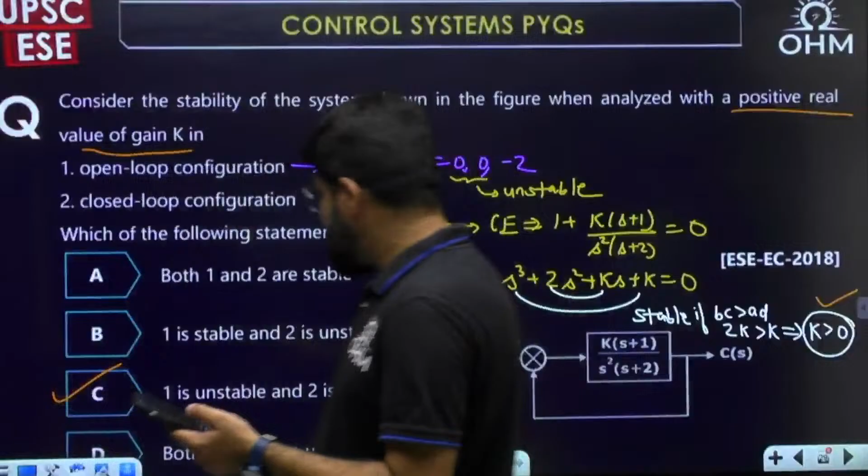So this is correct. So 2 is closed loop, it is stable. 1 is unstable, 2 is stable. Open loop is unstable. Clearly, for open loop, you need the open loop poles which is available, repeated, that too repeated at origin. So open loop unstable clearly, and the closed loop is stable for k greater than 0, and that is already mentioned in the question that yes, k is greater than 0. So correct answer C, option number C. First, open loop unstable, and second configuration, that is the closed loop, will be stable.

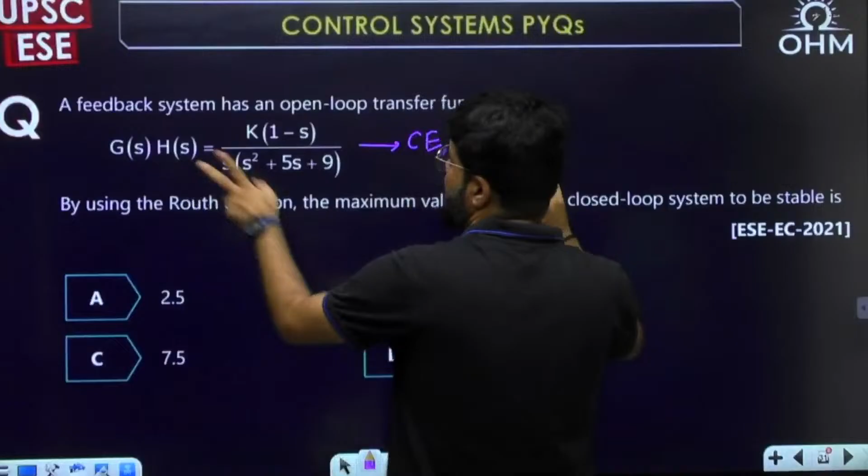Next one. Now see 2021, but again, if you try to form the characteristic equation, this is open loop transfer function. What is the characteristic equation? 1 plus open loop gain, 1 plus GSHS. So 1 plus K, 1 minus S upon S square plus 5S plus 9 equal to 0. So solving it, S cube plus 5S square plus 9S plus from the top K minus Ks equal to 0. So rearranging, S cube plus 5S square plus 9 minus K into S plus K equal to 0. Maximum value of K for the closed loop system to be stable, cubic equation stable.

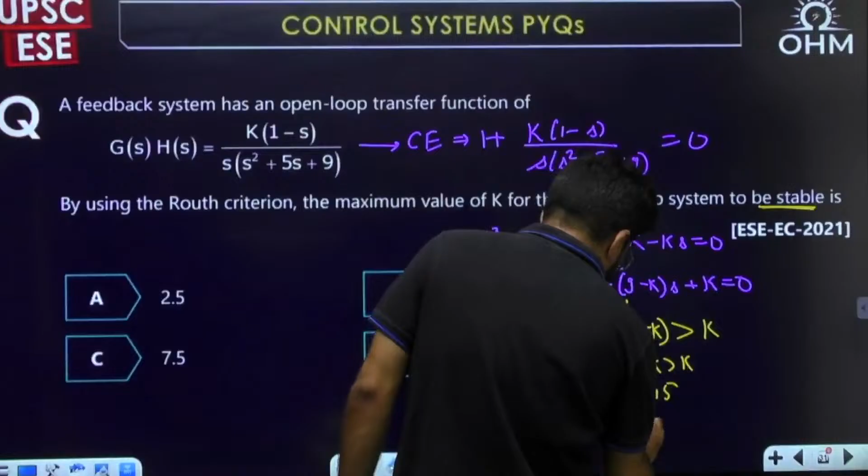If inner, that is 5 into 9 minus K, BC minus AD must be positive. BC greater than AD, greater than A into D, which is K. So what I want here: 5, 9, 45 minus 5K greater than K. That means, 6K is less than 45. So K is less than 45 by 6, which should be 7.5. The maximum value 7.5. Actually, at 7.5, it will become marginally stable. But yeah, that is what you can say as the maximum value of K for the system to be stable, or worst case, marginally stable. So option number C in this case. Again, a direct question I told you, from the cubic equation.

Next question. For the unity feedback system, the range of K. See again, cubic equation. What is the cubic equation? What is the characteristic equation? 1 plus K upon S, S plus 1, S plus 2 equal to 0. For the 2024 question: S cube plus 1 plus 2, 3S square plus 1 into 2, 2S plus K equal to 0. So for stability, BC, that is 3, 2, should be greater than 1 into K. So answer is K less than 6.

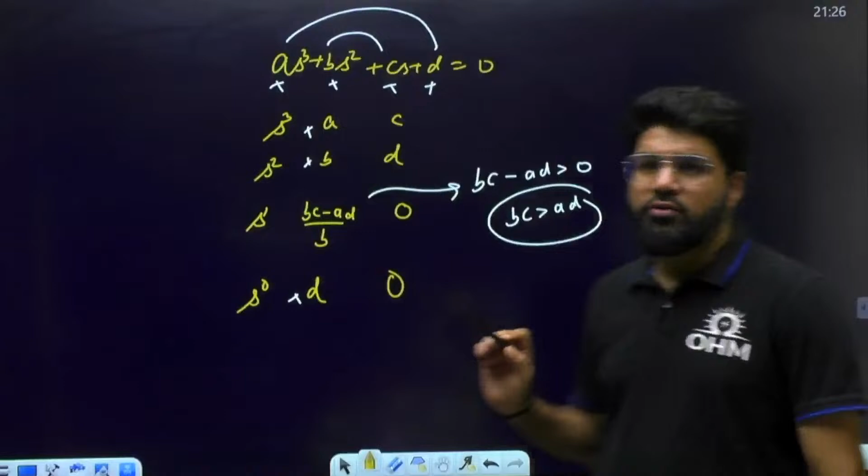And of course, positive. All these coefficients I told you, A, B, C, D must be positive. This K must be positive also, and at the same time less than 6. So I told you, even in GATE also, this cubic equation makes a very common question. So that is why, not for others, but for cubic at least you can remember: inner greater than outer for stability, vice versa unstable. Boundary condition BC equal to AD is marginally stable. So BC greater than AD is an important condition.

Okay, this is important. Next question: the system represented by this equation - is it stable, unstable? This is the characteristic equation of the system given to us. We'll definitely have to use the Routh array to deal with this question.

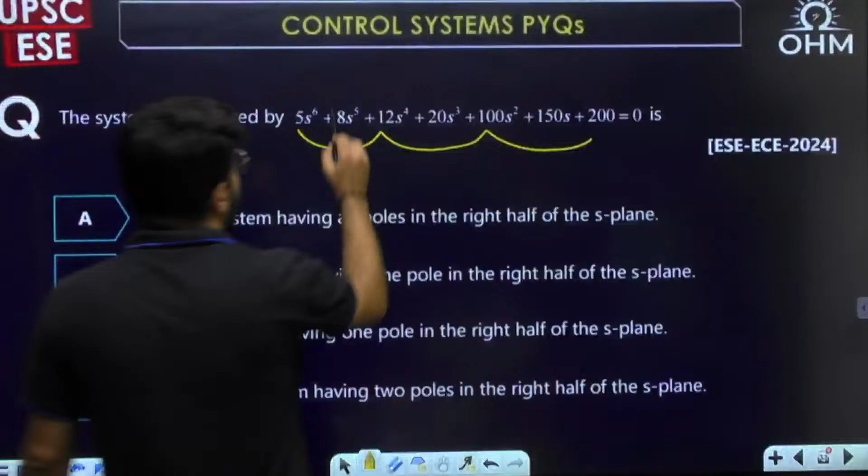So what are the alternate coefficients? 5, 12, 100 and 200. I'll start with the S power 6 row: 5, 12, 100, 200. Then S power 5 coefficients, which are 8, 20, 150, and then 0.

Okay, so what is going to be the S power 4 row? This is 8 into 12, 96. This itself is going to be negative, I believe: 8, 12, 96 minus 100, to minus 4 by 8, and then minus 1 by 2.

We'll simplify later. 8 into 100 is 800 minus 750, that is 50. 50 by 8. 8 into 200 by 8, so let this be 200 by 8. What I can do, dear, for simpler calculations at the next step - better to multiply throughout by 8. I will suggest better to multiply by the 8.

If you multiply by 8, I can take this row as minus 4, 50 and 200. I'll call this minus 4, I'll call this 50, because you can multiply or divide any row by any positive constant. Okay, now S power 3 row.

So definitely it is unstable - a sign change has come. Minus 80 minus 400, so minus 480 divide by minus 4. I will simplify later. Minus 600 and minus how much - 1600. Minus 600 and minus 1600, correct? Minus 2200 upon minus 4, and 0, 0.